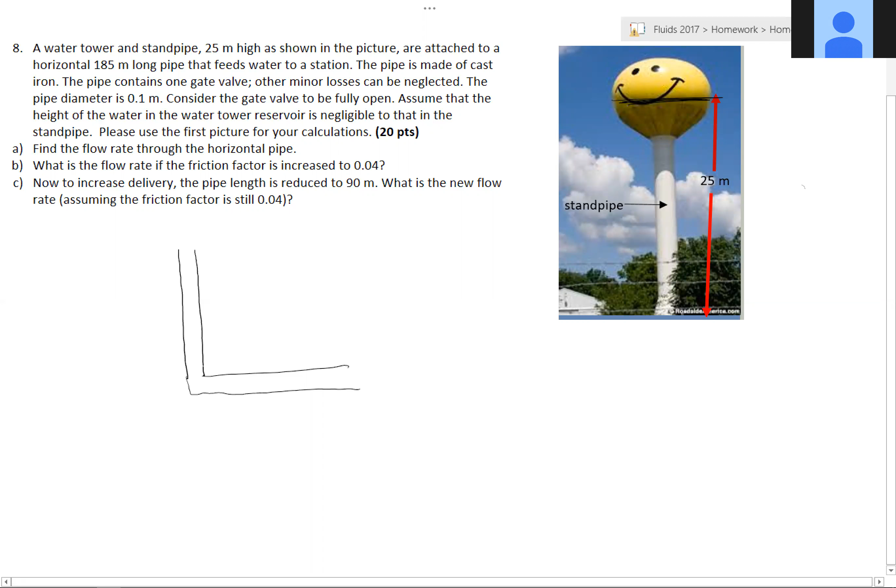So let's take a look at this. We start with the energy equation, which is in so many different forms. You kind of have to decide which is the easiest one.

So here, if we look at this, let's call this point 1, which is the top of the water tower, and let's call that point 2. Did my annotation stop? Can you not see it? Can you see it now?

We're going back to Bernoulli's about points 1 and 2. Maybe it would help if I wrote out the whole Bernoulli's equation. What can we say at 1 and 2?

P2 is atmospheric, so we know that P2 is equal to 0.

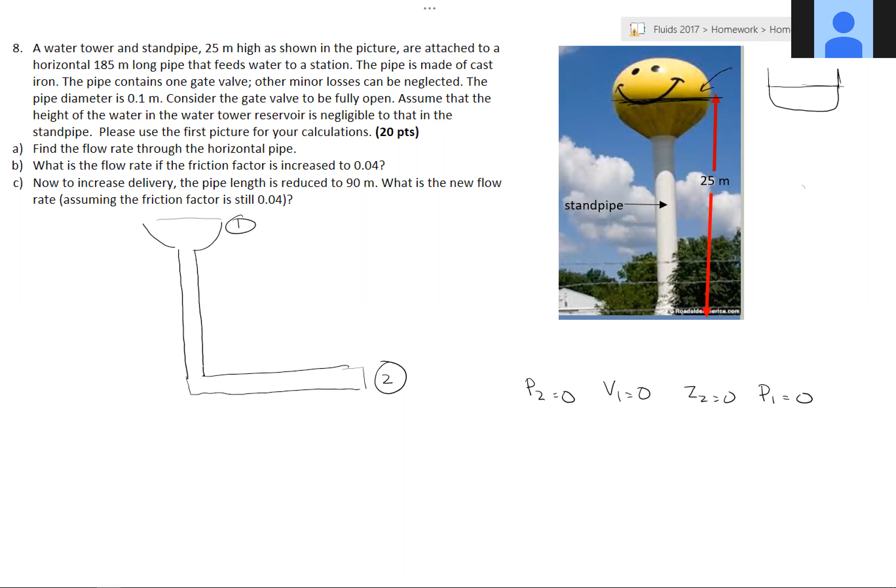Okay, all right, so we have that. And now let's go back to what our equation is. Again, I put it everywhere else but here. It's that super Bernoulli equation.

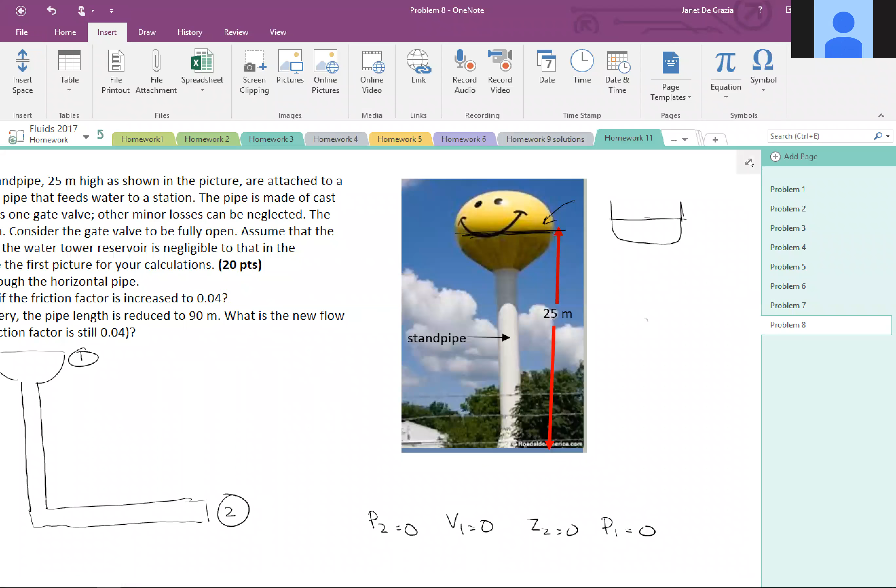So let's go back to this and figure out, first of all, we're looking for the flow rate. Second of all, basically, how do we find it? And there are different ways to do this.

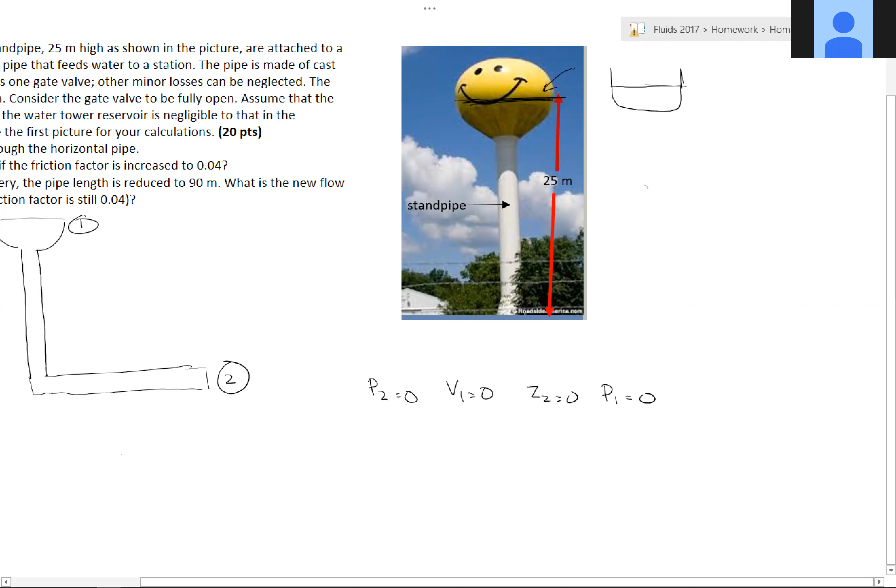So on our left-hand side is equal to our pressure. Now we can say V1 is 0, but we can't say that Z1 is 0. Actually, no, we can't, because this is point 1 up here. So what do we know about Z1?

What is that going to be equal to? Yeah, that's equal to 25 meters. So that's everything that's on the left-hand side, right? Let's look at the right-hand side. Okay, is the velocity 0 here?

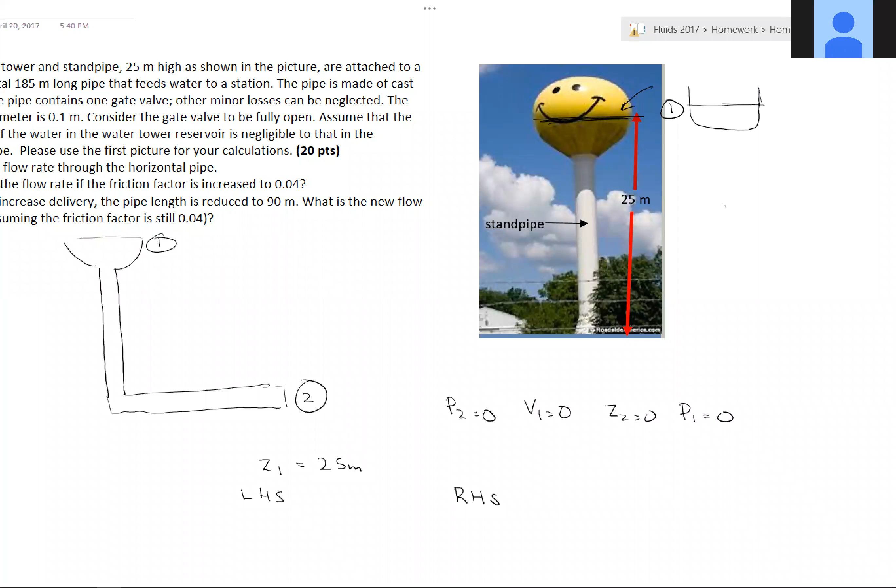No, in fact, since we are looking for the flow rate, we have a velocity term, and we can call that V2. What did we say about Z2? Yeah, that's equal to 0. So Z2 is equal to 0.

But what we have in there is head loss terms, so we have to figure out what those head loss terms are. Let me start looking for my notes here.

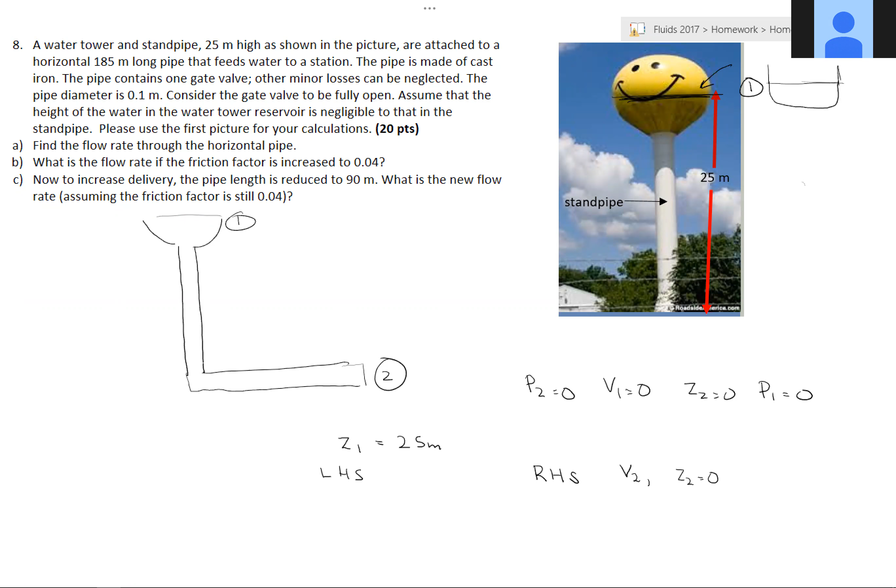We have two kinds of head loss, right? This is how they define it in the book. So we have our major head loss, which is equal to F L over D, V squared over 2.

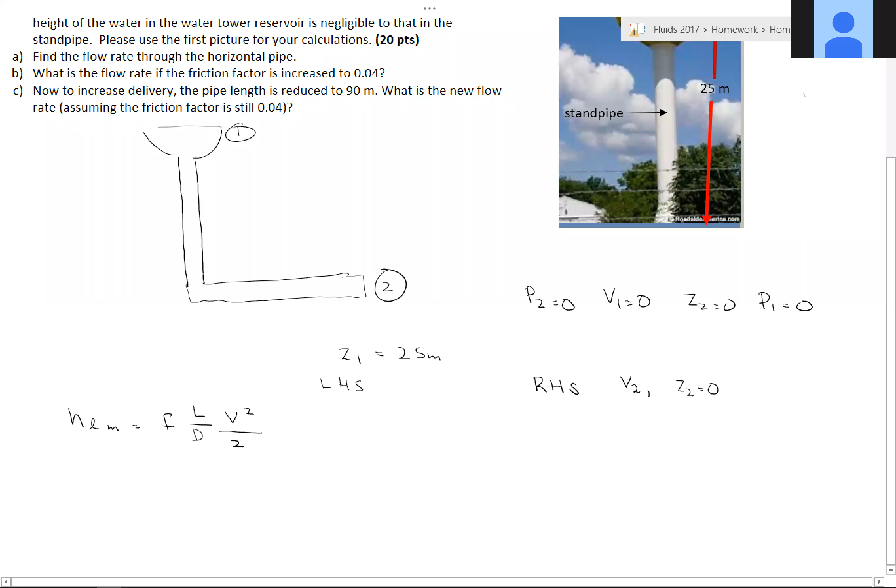And what velocity? That's actually a very good question, right? Where other minor losses can be neglected, that's a good question. That's not considered a minor head loss - actually probably should be, but right here we're just looking more at the gate valve. So here's our major head loss.

And then here's our minor head loss, which is equal to K from the gate valve times our, again, our V squared over 2. So what's the hard part about this? V squared over 2G.

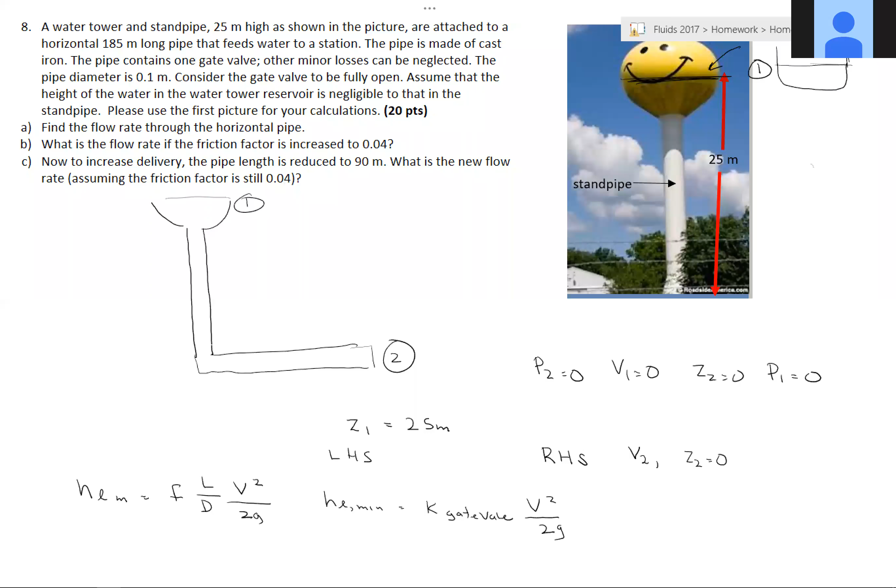Yes, so what's the difficult part with this problem? We're looking for our Q. So first of all, finding the right K is true, but all you have to do is look it up, because I think I said a fully open gate valve.

So there's a table that tells you what all the loss coefficients are, and there's one thing that says gate valves, and one of the gate valves is open versus closed. You can imagine why it would be different - there'd be different flow patterns.

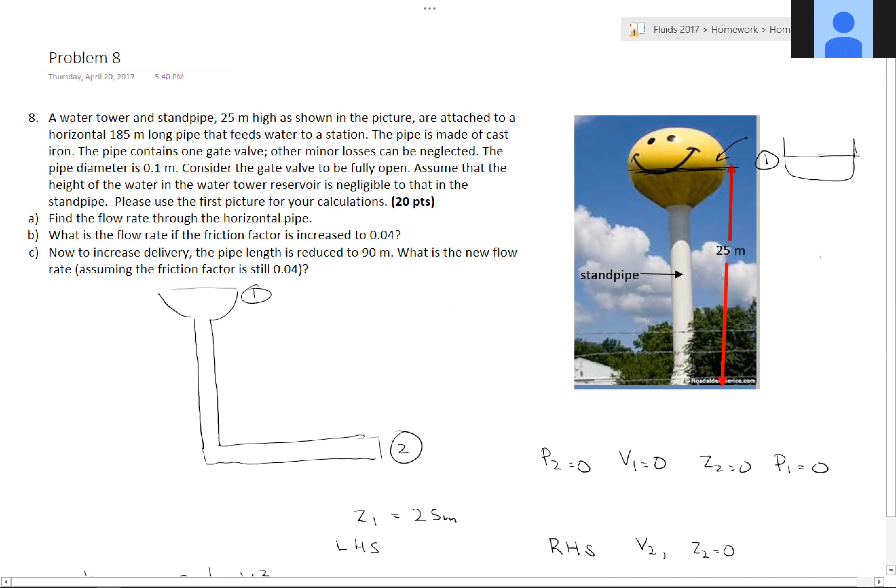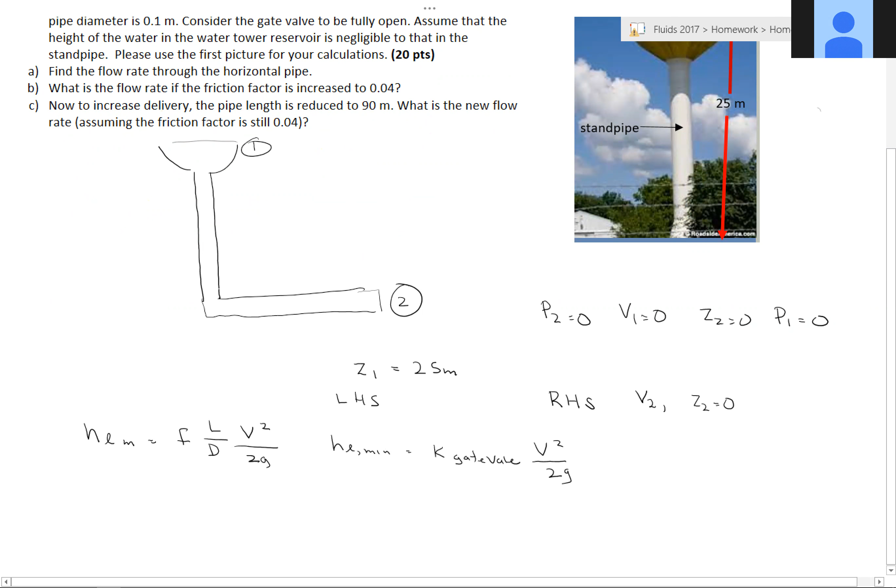So how are we going to solve this? What is it that we're looking for? Right, so we're going to have to make an assumption. And your best bet is to make an assumption that it is the worst possible scenario, which is what?

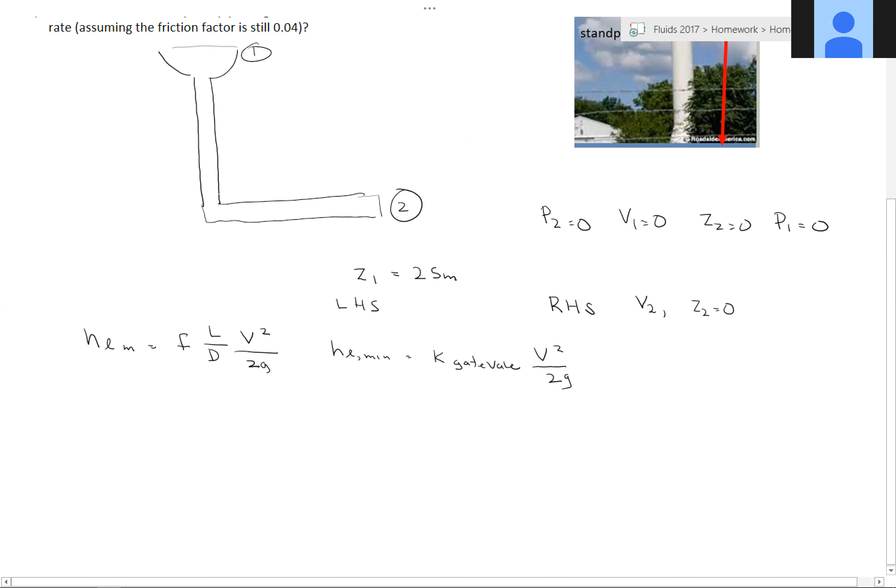Yeah, and why? It's actually beyond that. Why would you think it is turbulent? What about this problem here? Why do you think that velocity?

Yeah, it's that 25, right? Nothing's ever easy - it is that 25 meters. So when you have that much of a height, you can pretty much guess that it is going to be turbulent. Okay, so we're looking for our Q.

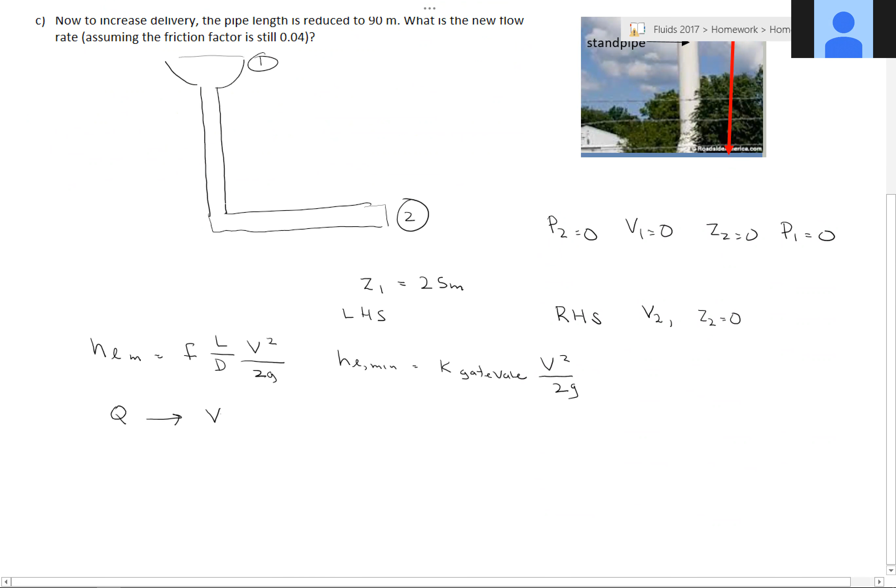And in order to get our Q, we need our velocity. So we don't have a velocity. We're going to have to use our super Bernoulli's equation, which is basically that P1 minus P2 equals, and then you have your Z's and you have your head losses.

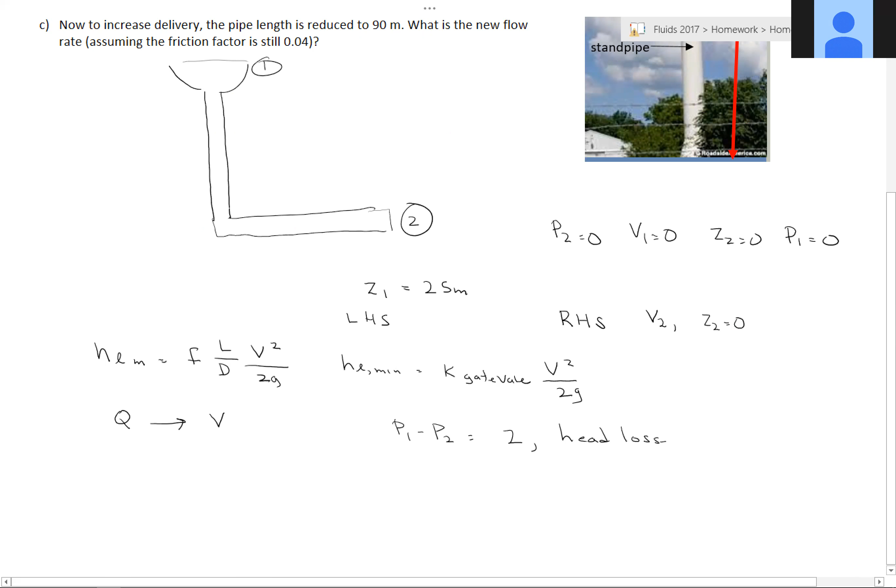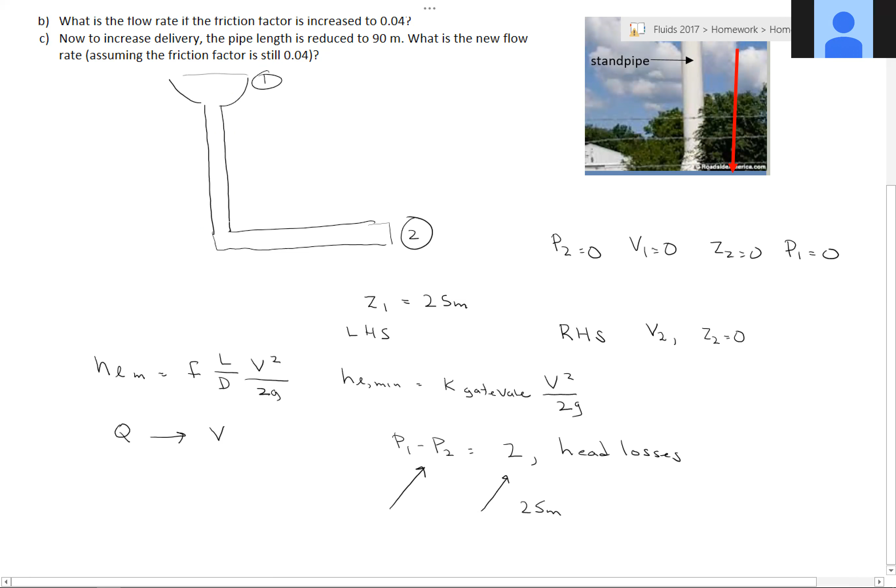So we have P1 minus P2, which is what? 0. Exactly. We have our Z1 minus Z2, which is what? 25 meters. The problem is when we look at these different head losses, we need a velocity, and we have a friction factor. And that friction factor is a function of both the Reynolds number and our epsilon over D.

So can we find our epsilon? Yep, I told you it was cast iron. What's the problem, though, with the Reynolds number? Yeah, we need the velocity.

So the way we're going to have to do this, and you're going to do this for every single one of your problems, is - and I'm going to try something, and if it doesn't work, don't worry, I will come back.

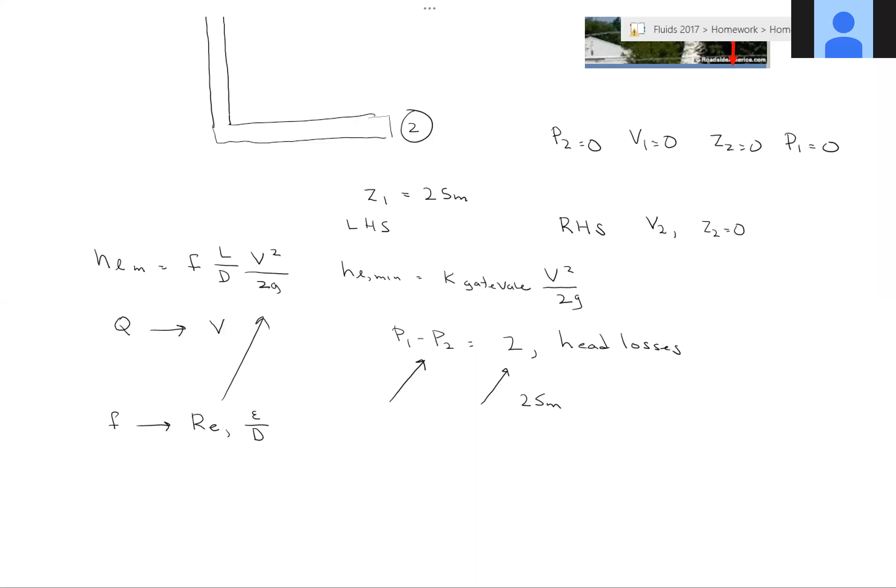That's not what I was looking for.

Are we going to use Excel? There are actually only two problems where we need to use Excel. If you go back to the book, it says if you're looking for a delta P or an L, you can solve directly. If you're looking for a velocity, a Q, or a diameter, you have to solve iteratively. So anytime you ask for the diameter, there are two problems: one with the diameter and one with the Q, meaning you have to do an iteration.

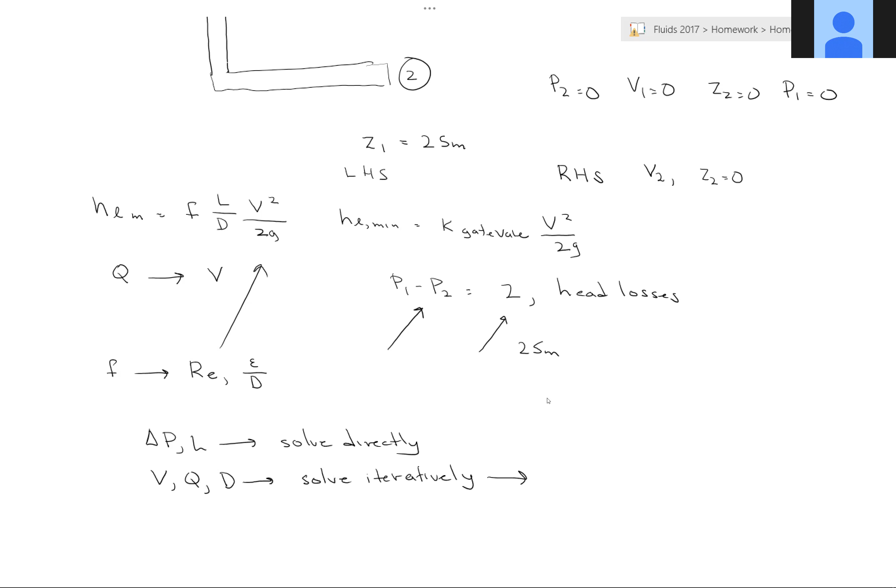So hold on, we're going back to this. If you look at the very top one here, I'm moving this. That H is the height that we have. What I did was set it up as an equation with V squared so we could solve for this velocity.

So here we wrote out our simplified Bernoulli's equation. Then I rewrote it so we could solve for the velocity. And then we need to use that velocity in the Reynolds number, and we need to use that Reynolds number in the friction factor.

So what we end up doing is, as I said, we guess a velocity, put it in the Reynolds number, put it in for the friction factor, and then set everything equal to 0 in the solver. So why is P1 equal to 0?

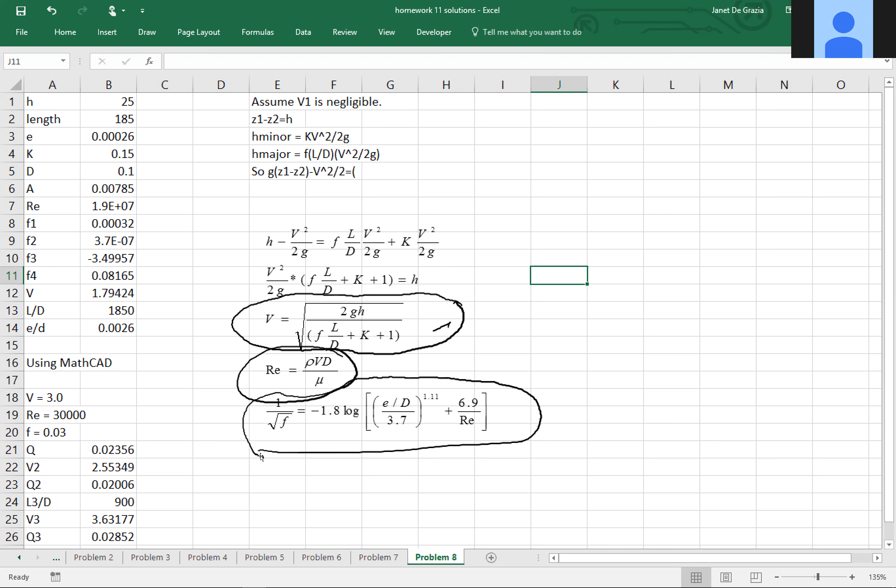Basically what we have here is when I did the water tower, I was trying to be cute, but really the way the water is, it's like this with atmospheric pressure. Does that make sense? Okay.

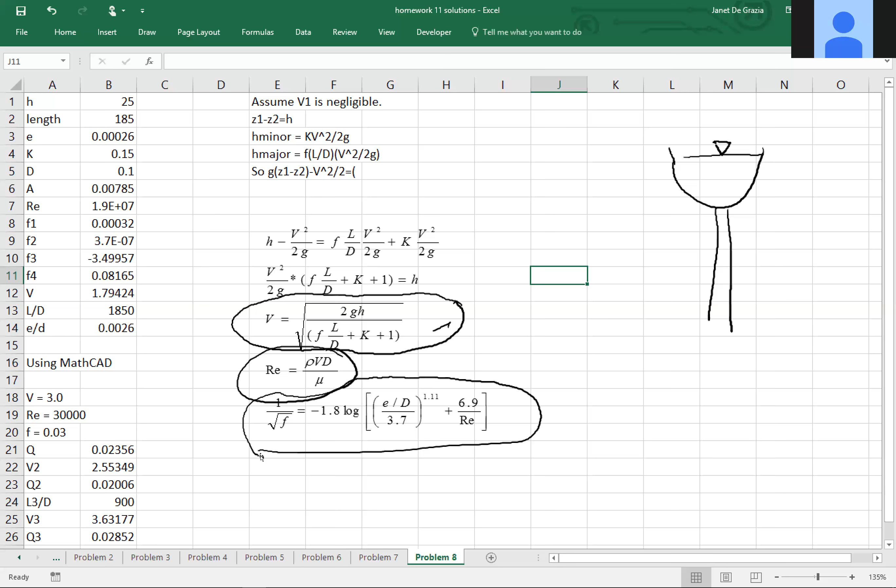One of the things I'd like to do is go through one of these problems. We may switch around with problems because I want you to see how you use the solver. I guess this is a good one to look at, problem 5. This is what I'm going to show you: setting what equal to 0. Is everybody on problem 5 and my Excel sheet?

Okay, so in problem 5, and again, I hate to keep moving around, but this is the one I was going to start with, so that I could show you how to use the solver. Let me go back to problem 5. Hold on, you're going to lose me for a second, but I will be back.

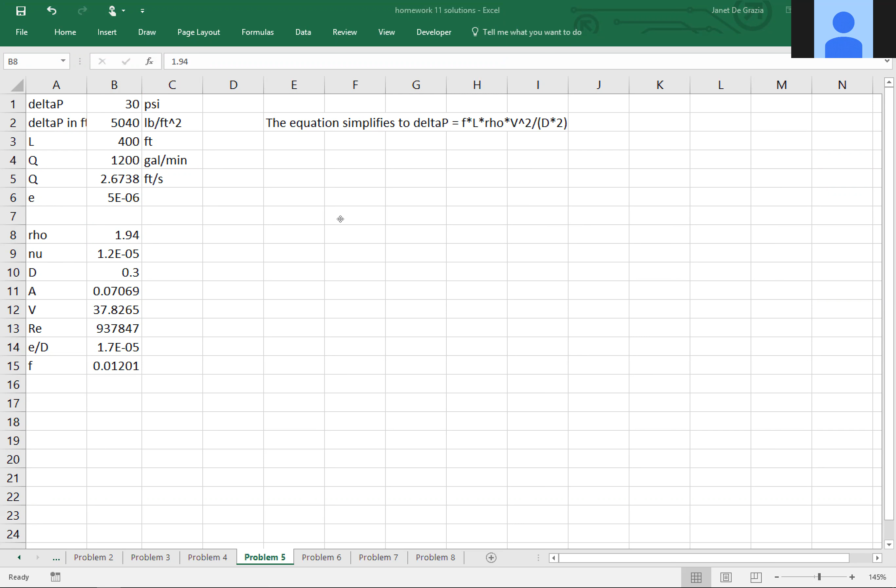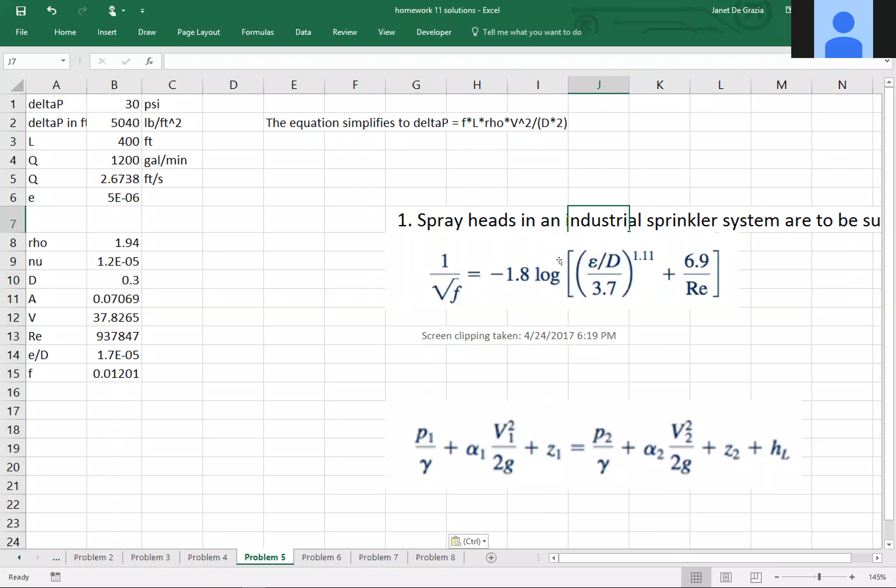Okay, so this is the one with the spray heads and everything like that. Basically what happens is we have this that simplifies to this delta P, which is F times L. Let me write that out: delta P is going to be equal to F times L times rho times V squared divided by 2D.

So what I did for problem 5, the first thing is you want to work in feet because everything is in feet. So here was our delta P, and then I changed it into pounds per feet squared rather than inch squared. Here was our length, and then I changed our Q to feet per second. Stop me if it's not making sense—I hate to keep going back and forth, but this is really the one I think will help you. Then I looked up the epsilon.

If you take a look at the problem statement, it says drawn aluminum tubing. So you go look up in your table what that epsilon is. That's good enough—drawn tubing is the same as drawn aluminum tubing. So the table 8.1, is that the one that has all the epsilons in it?

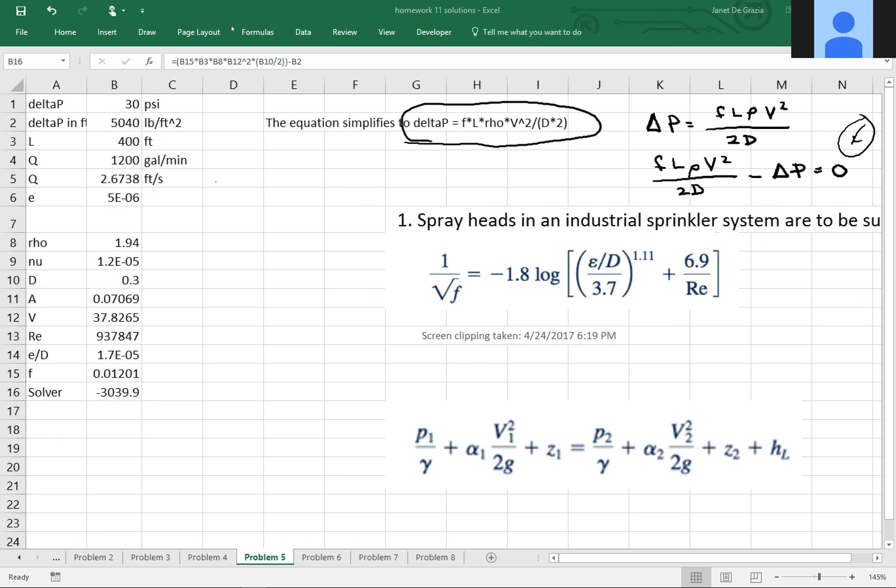Now, what this is, what we're trying to do is we're trying to use solver to find our diameter. And what we've done is we've guessed the diameter, we've put that into every single one of our equations, and now what we're going to do, when we do solver, we're going to say that we want this objective to be equal to 0 by changing, if you notice, changing the diameter.

Is that the same? Yes, that's exactly the same. So you can write it any way you want, okay? And so now we just click solve.

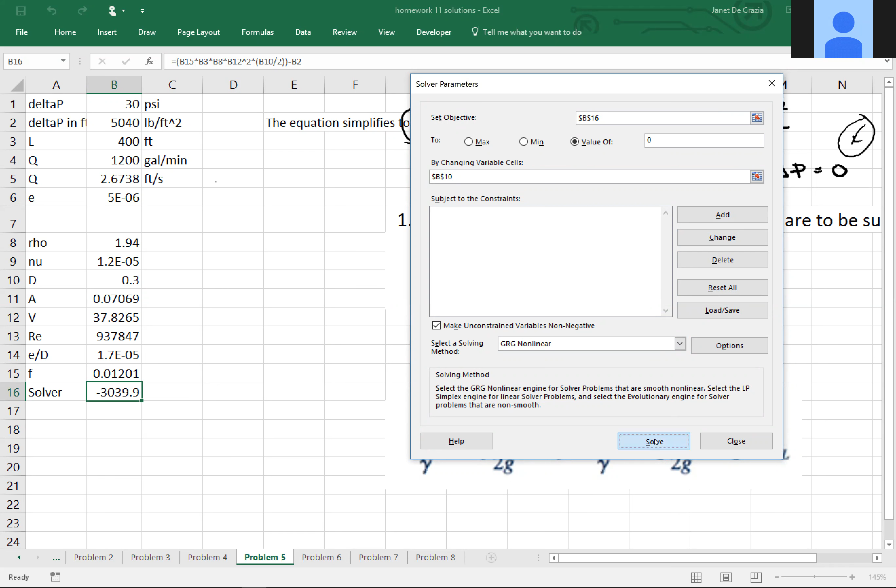And what it says is they found a solution, not a great solution, such that the diameter is equal to 0.218. And the reason that's not right is I have a couple of things entered wrong. But note, when we did that, the area changed. Yes, the solver equation is entered correctly. What isn't entered correctly is the epsilon. The velocity, the Reynolds number, everything changed

based on that. So what is nu? That is the kinematic viscosity. So that's anytime you have an iteration, that's what you're going to have to do. You're going to have to find something like this, rewrite it in terms of something equaling 0.

And if you notice here, first we had the friction, which is a function of the diameter, and we had the Reynolds number, which is a function of the diameter, and we have the friction factor that's a function of the Reynolds, etc. So we have to put them all in there.

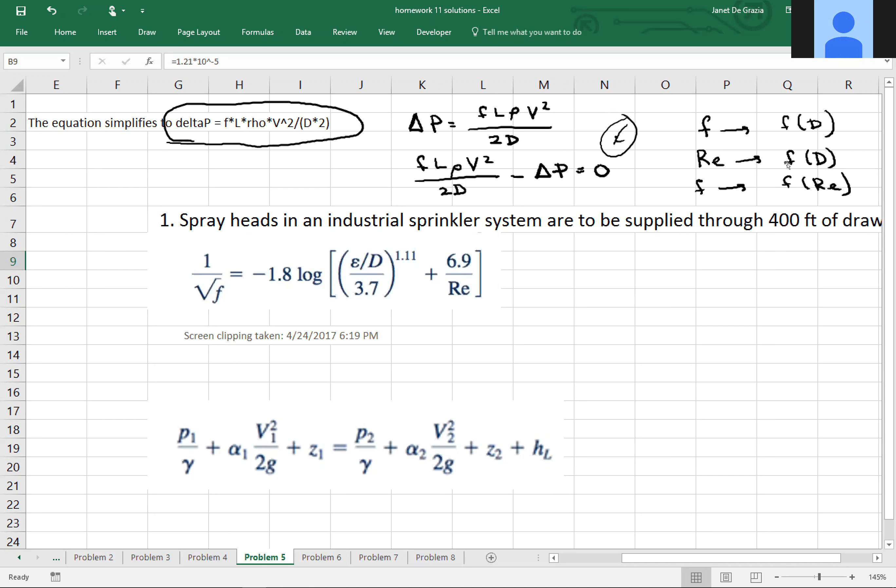Do we get rid of the velocity? No, we use them. Oh, you mean in terms of the actual equation? Yes. And now let's go back to that problem and actually the rest of the problems.

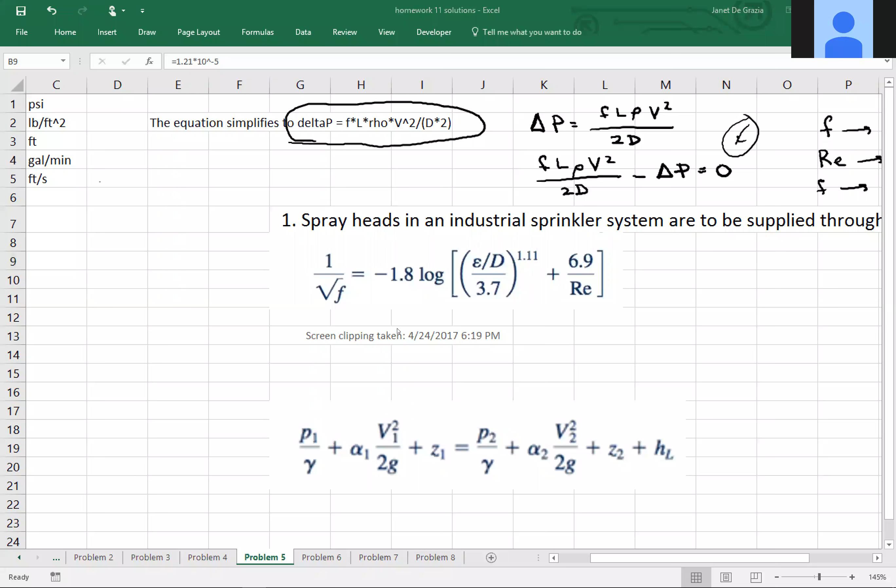So if you take a look here, what we did was we got rid of all the velocity components and the height components, because we were able to do that since minor losses and elevation changes meant they're at the same height. So for this one, V1 was equal to V2.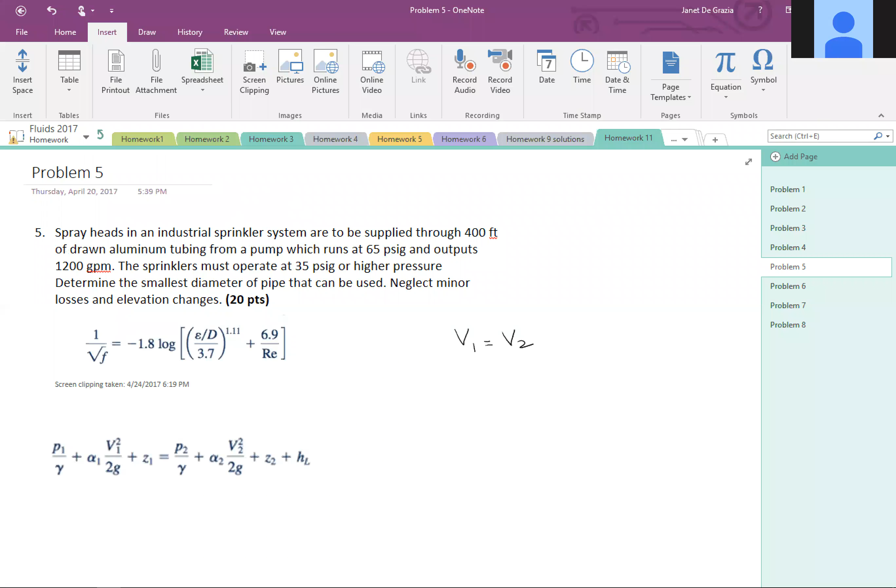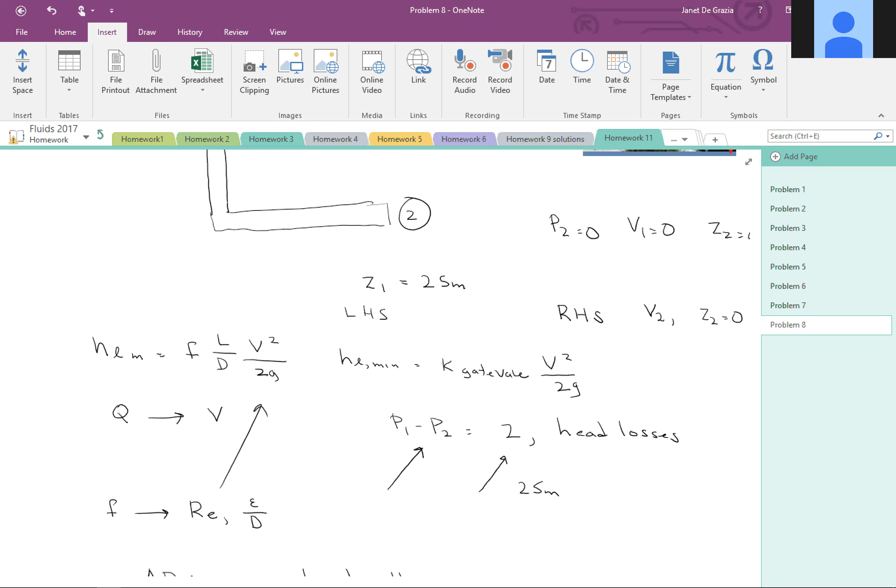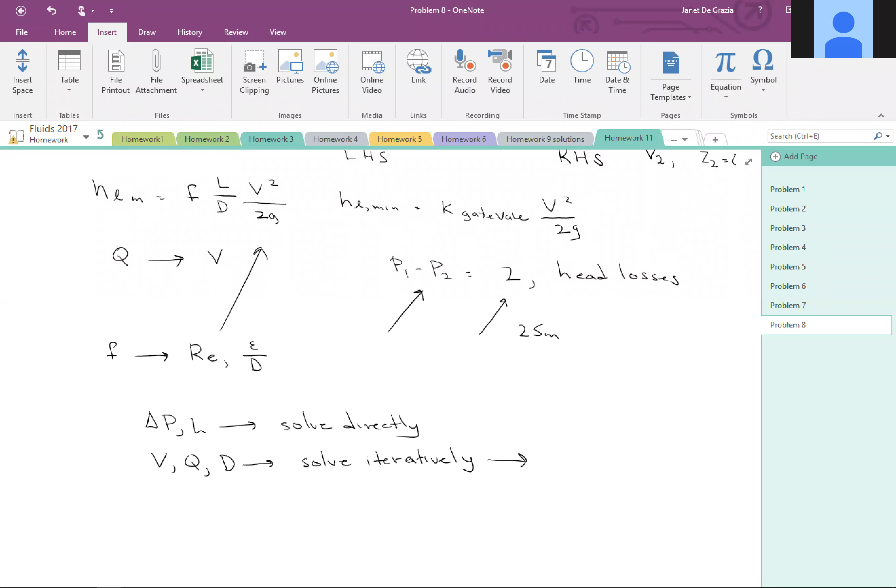What I want to do, and then I'll come back to that problem, is go back to problem 8. We're going to have to do the same thing with the velocity - we're going to have to iterate. We'll put the actual equation, simplified, guess a velocity, take that guessed velocity and put it in the Reynolds number, and then use the solver. That's only for the case when you have a velocity, a Q, or a diameter. Actually the one I showed you, number 5, with the diameter, is harder because the diameter is more of the problem. But what you're really looking at here are these two equations.

These are the ones you're going to use. For this, what we want to do when we put it in Excel is solve for the friction factor, which we can do directly. How do we solve for that friction factor using that right-hand side of the equation? We take this, minus 1.8 log of blah blah blah blah, and raise it to the minus 2. And one of the things I was saying earlier - why assume turbulent? Always assume turbulent.

Anytime you have something like an industrial system, a water pipe, spray heads, etc., assume turbulent. Now when you calculate it - let's say you calculated your velocity or whatever - then you go back and look at your Reynolds number. And if your Reynolds number is laminar, then you can go back and use 64 over the Reynolds number. But it's almost always going to be turbulent.

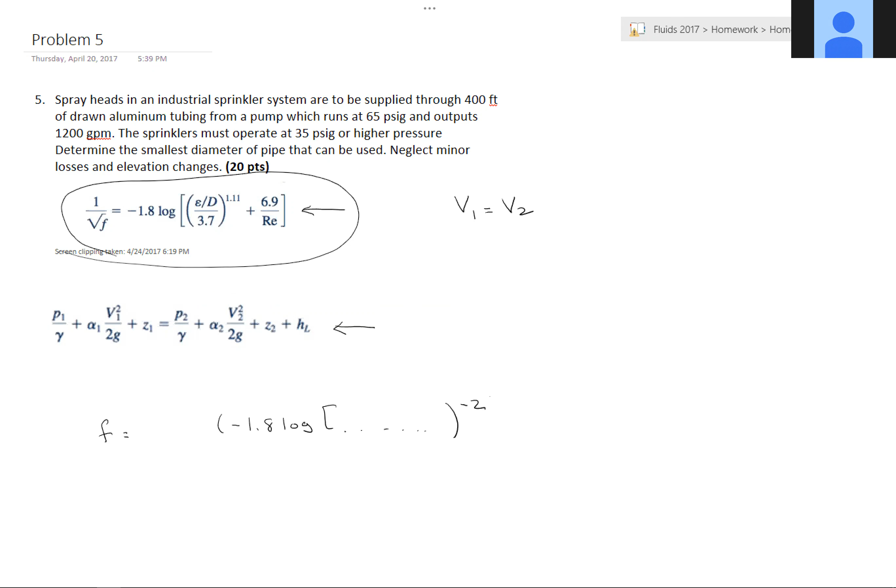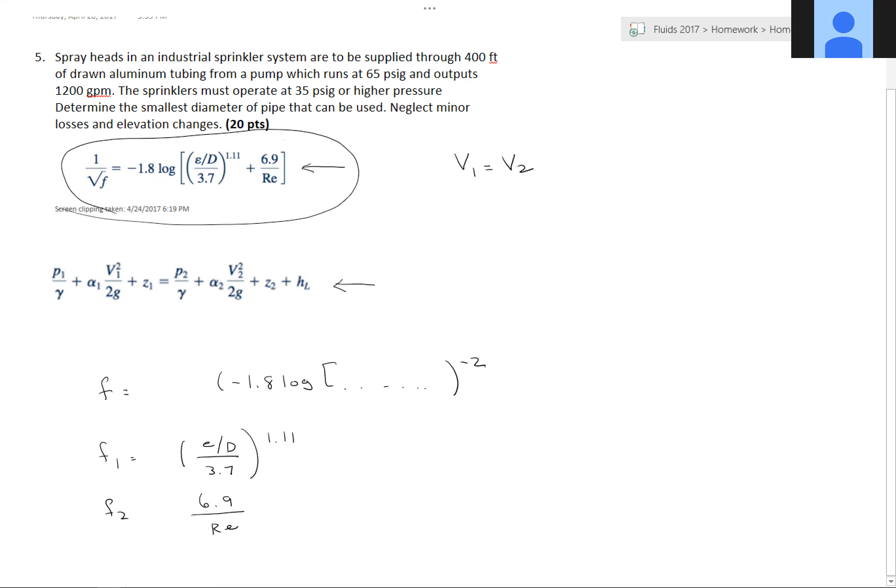One of the things I was telling people before - when I did some of these problems to find that friction factor, the first thing I did in Excel, I called it F1, and I calculated this divided by 3.7 to the 1.11. Then my F2 was 6.9 divided by the Reynolds number, and then my F3, etc. I did it step by step because you really have to be careful with the parentheses in Excel. So the bottom line is that both 5 and 8 require iteration, so they're going to require you to use the solver.

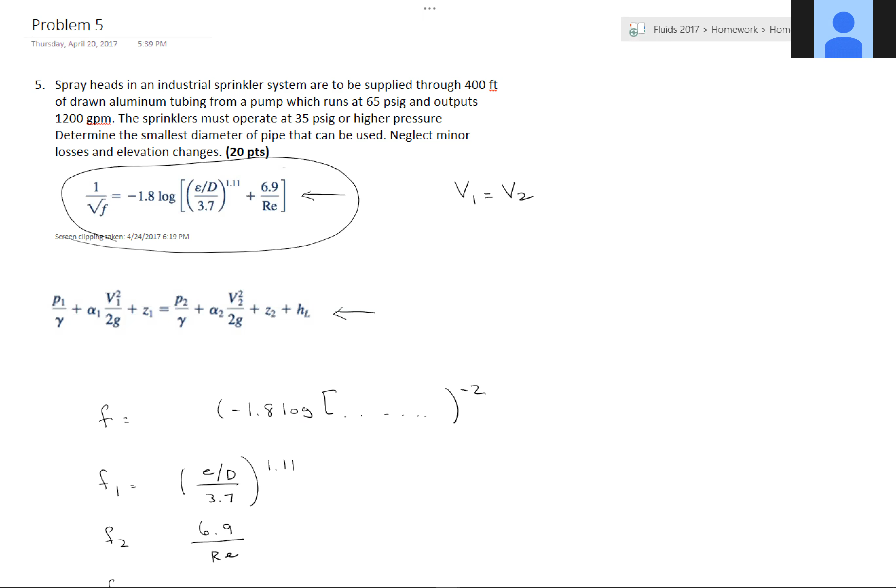So I promised that the next one we would do is number 6. Let's take a look at it. We have a corroded galvanized iron pipe. We have an inside diameter, and we have a delta Z. The important thing here is how do we draw that? So we have P1, let's say here, which is 700 kilopascals, and then 6 meters lower, this is 525 kilopascals. So the way the pipe looks is this.

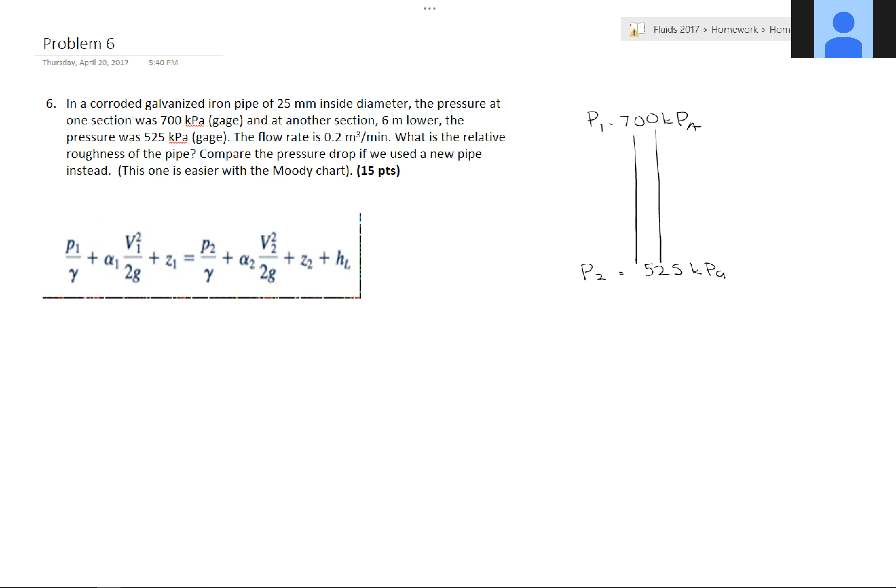So the question is, how do we know that? Part of it is because you know the difference in height has to be 6 meters lower. And if you had it at an angle, there's no way you would have the length of the pipe - or you would have the height but not the length, unless you had the flow rate. Okay, and again we go back to this equation. What we're looking for is the relative roughness of the pipe. So basically we're looking for - you could either say this, but I would take this as well. So where do we get that relative roughness?

Yes, certainly the head loss from the Moody chart, which is when we're looking for friction. So what we can do here is solve for the head loss, which means we can find our friction factor. And from the friction factor, we can find epsilon over d, and from that we can find epsilon. Or we can find our Reynolds number as well as our friction factor, and then use the Moody chart to find our epsilon. Either way, we're going to use our simplified equation.

For our super Bernoullis. And by the way, when you look at this, you have delta P. What else do you have? You have a delta Z. Exactly. What about the velocity?

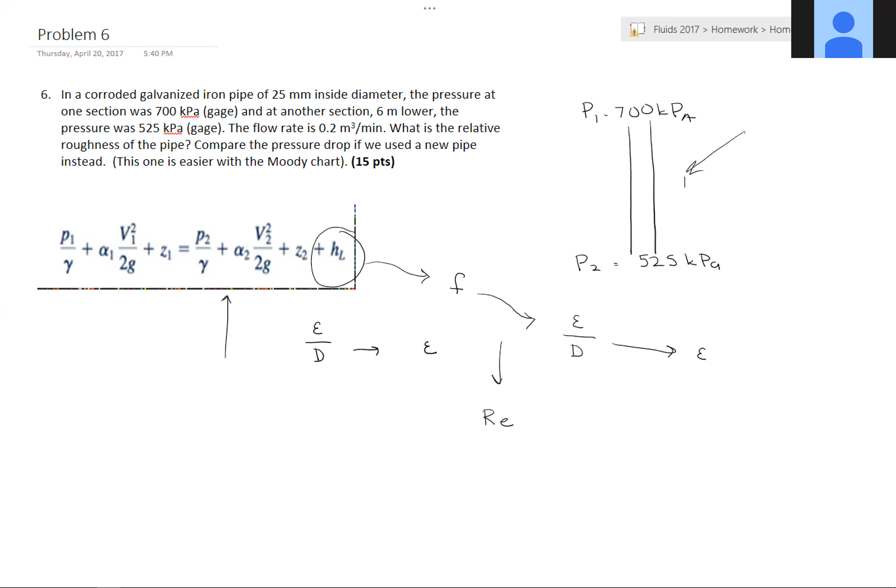Okay, all right. I promised that I would look at number 6, and then, oh, thank you. What material it is, what do you mean? So there is a range of epsilons if you use riveted steel, but if you use commercial steel, there's only one. Do you see that? All right, let's take a look here.

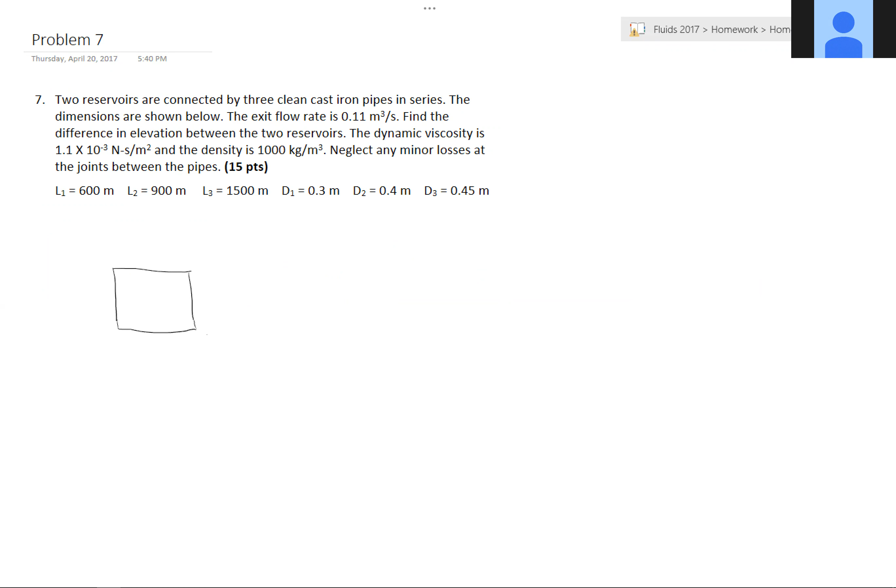Oh, let's do number 7. Anybody interested in that one? Yep, good. All right, so we have 2 reservoirs, so let's draw them. So here's one reservoir, and here's the other reservoir. And they are connected by 3 iron pipes in series.

So, let's see, sorry. All right, so first of all, if you're going to connect the pipes, where are you connecting? Where do you think the pipes are going to be in terms of the reservoir? Yeah, so not bottom to top, okay? Because remember, you have this huge reservoir, you're not going to be wanting to dump water into that reservoir. So absolutely, we're going to start from the bottom.

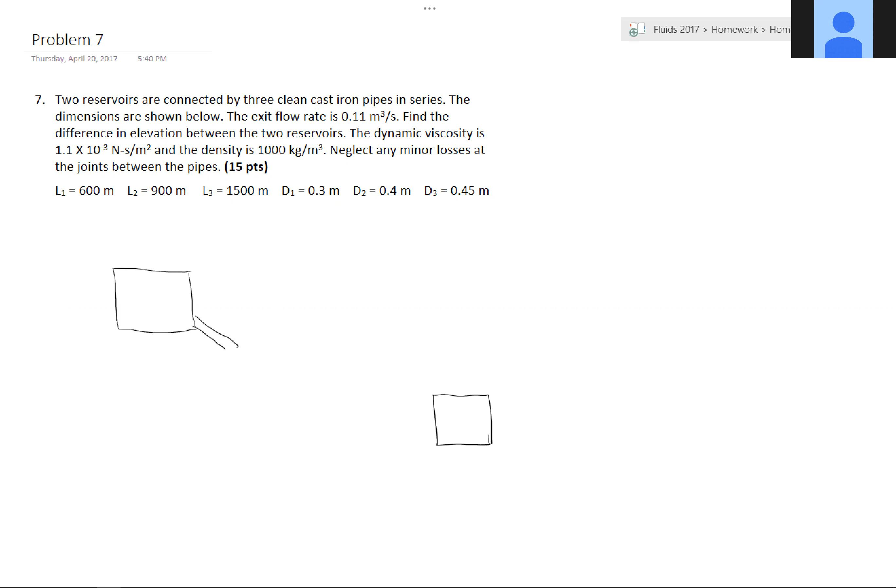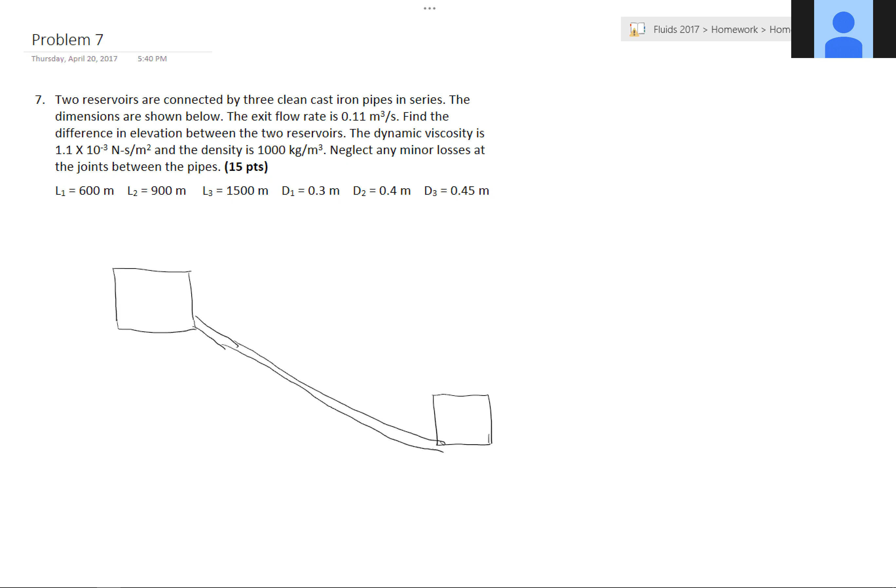But where do you think it's going to go to? Yeah, so it goes from, no, actually it goes from bottom like this. And why do you think it does? What would be the difference if it went from bottom, let's say instead we went to the top? What would be the difference? Less splashing, certainly, different pressure. No, no, no, we're getting there. Gravity's getting closer, what's the big difference?

Getting closer, that delta Z is going to change. Exactly. The biggest difference is if you go from bottom to bottom versus bottom to top, you're going to have less of a delta Z. And if you have less of a delta Z, you're going to have a lower flow rate. Okay? Does that make sense?

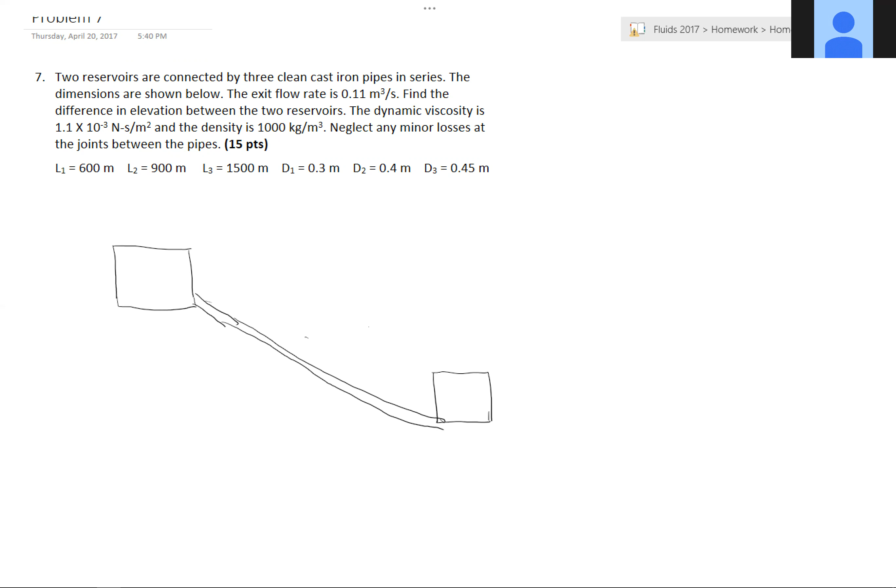Okay, so that's why in something like this, you would go from bottom to bottom. When it says we have this exit flow rate of 0.11 meters cubed, find the difference in elevation between the two reservoirs, and then I give you the dynamic viscosity and the density. Neglect any minor losses at the joints.

We're going to do our super Bernoullis, and we're going to do it from where to where and what. But remember, we're looking for that delta H.

So why would you do it from top to top? What kind of information do you have there? By the way, that would give us delta H, absolutely. So here's our delta H.

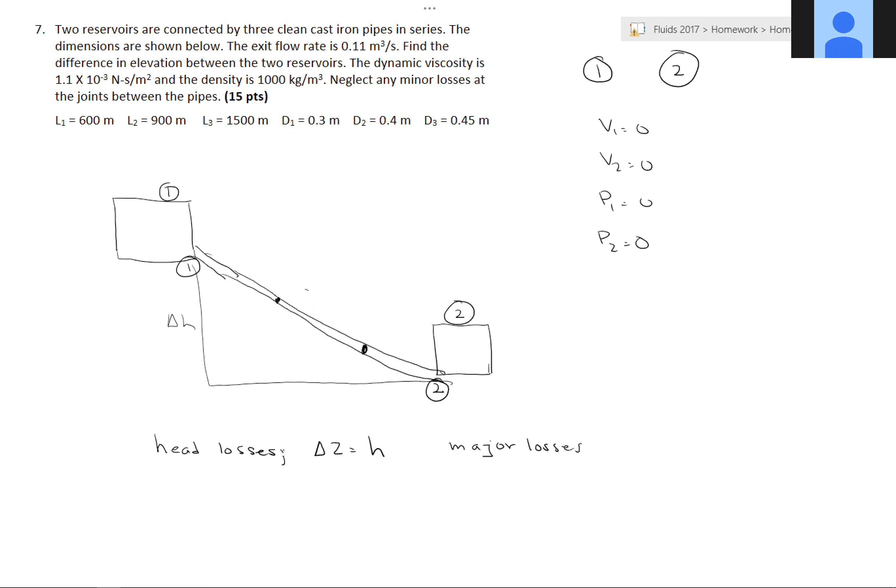So why is V2 zero? Because this is a reservoir, and anytime you have a reservoir it's much larger than the pipe. It doesn't matter if the pipe's going in or the pipe's going out. And yes, we are doing top to top right now.

It's not the exit flow. What we're saying is we're looking at this versus this. We are not looking right here. Obviously, that is not going to be zero. It's absolutely not going to be zero.

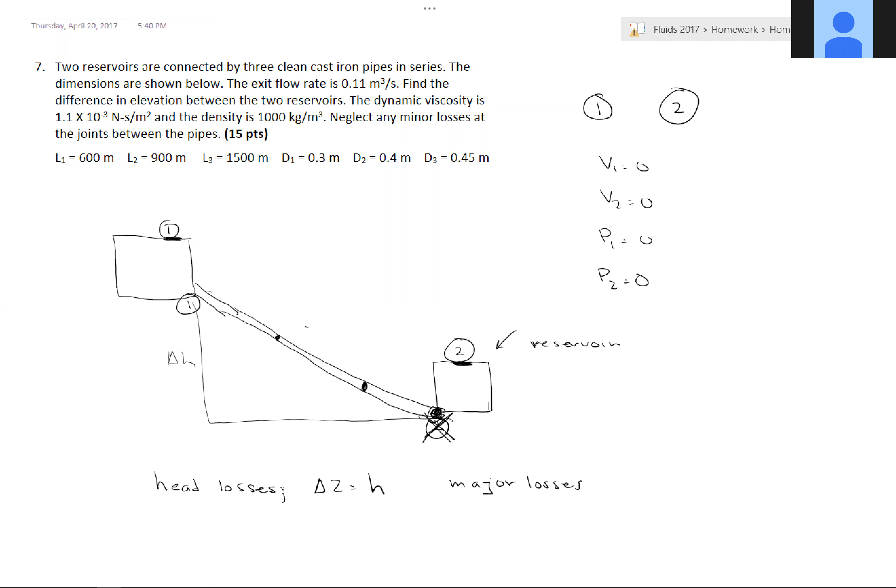How are we, by the way, going to find out velocity? Because we are going to need it. Yeah, we're going to find it from Q. So we're going to be able to find all these velocities because that Q is going to stay the same.

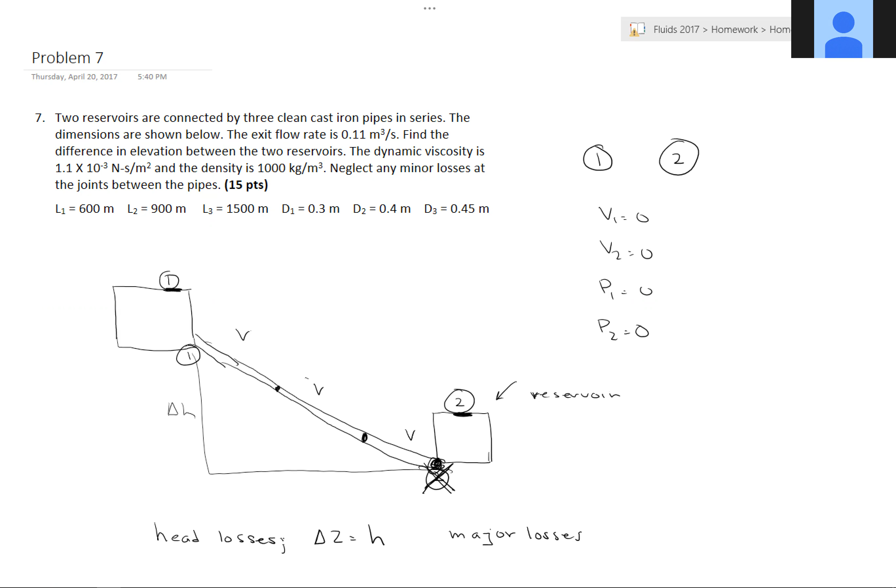No, you don't average the diameters or the length. You have to find it exactly right. We have to find the head loss for each one of the sections. So basically what we're going to have to do is find the velocity for each section. And how are we going to find that velocity for each section?

Using Q, so that's going to be Q over A. And it's going to change because the area does. And then once we find the velocity for each section, what are we going to find next?

Yeah, so then we're going to find the Reynolds number for each section. And we know what the epsilon is and what the diameter is. So then what are we going to find for each section?

That's exactly right, then we have to find the friction factor for each section. And by the way, why does that change? It's the same height, but the diameter changes, therefore the Reynolds number and the velocity are both changing.

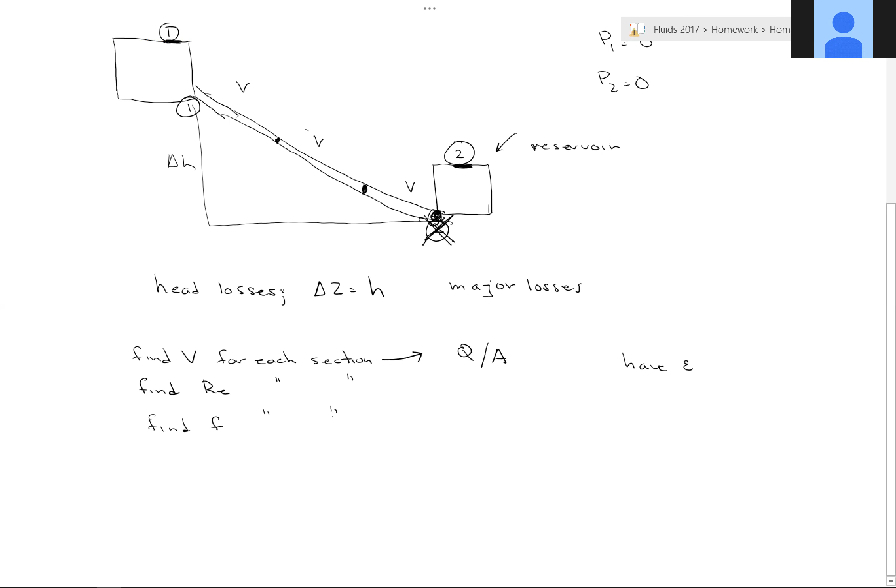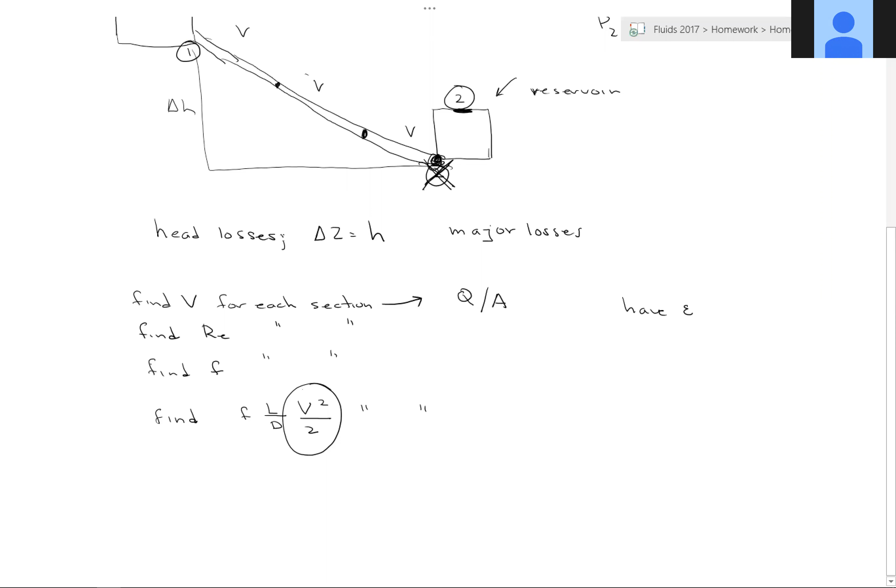Okay, and then what we're going to do is find that head loss for each section. And this velocity, remember we're talking about what we were saying before, is the velocity in each one of these pipes. Okay, now are there any, let's see, anything there?

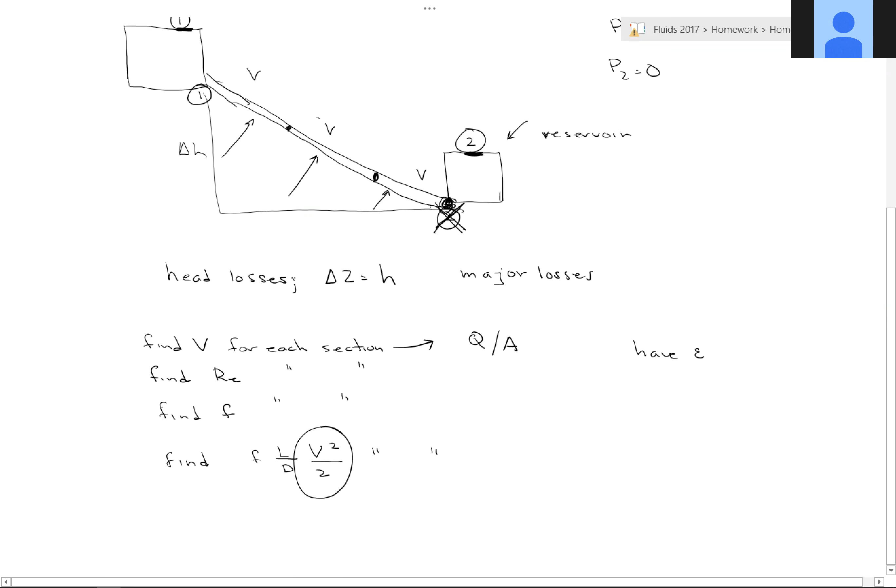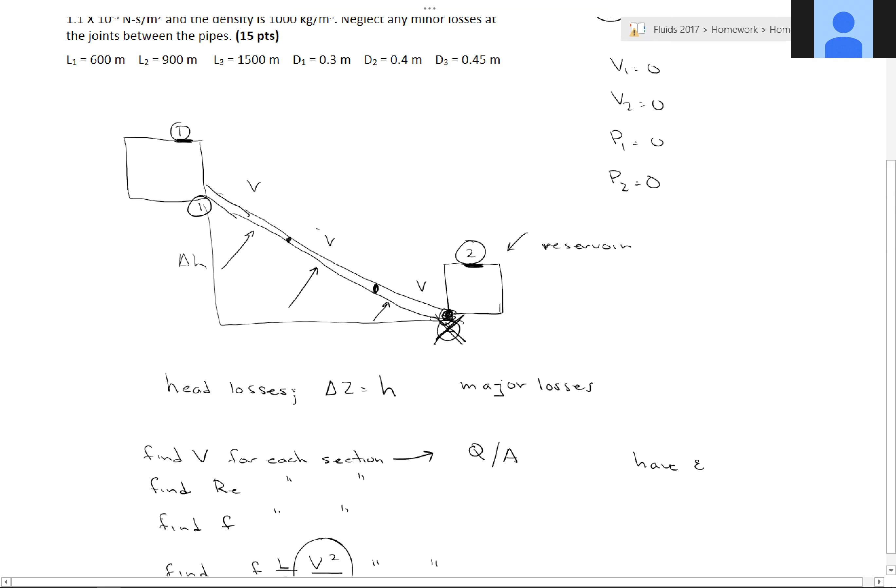Why top to top? Why does it make it easy? Let me show you what would happen if we didn't use top to top. Why top to top rather than bottom to bottom?

So if we decided instead to do 1 and 2, would V1 be 0? Would V2 be 0? Would P1 be 0? Would P2 be 0? Exactly. So it makes it a lot easier. It's still the same height. That's one of the things about these energy equations, or what I call super Bernoullis.

You can pick the place you want it to be, so what you do is pick the easiest place. That's why we went top to top, because we don't know the pressure. At least we know what the velocities are, but we don't know what the pressure is. All right, so then once we find that...

We have to do section by section because the velocity changes in each section because the diameter changes. The Q is always going to stay constant, but the velocity changes because diameter changes, so area changes. And if those change, then the Reynolds number changes, and then the friction factor changes. So that's why we, okay, cool beans is good.

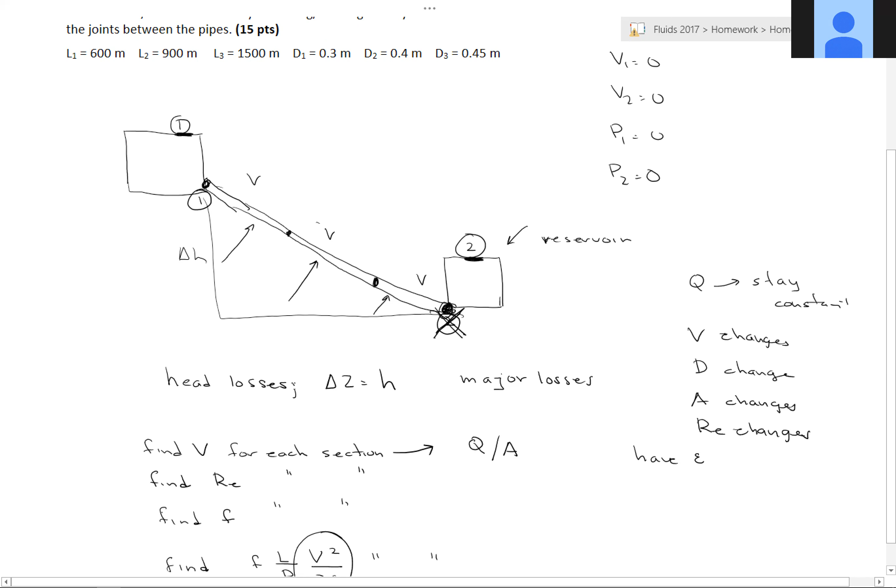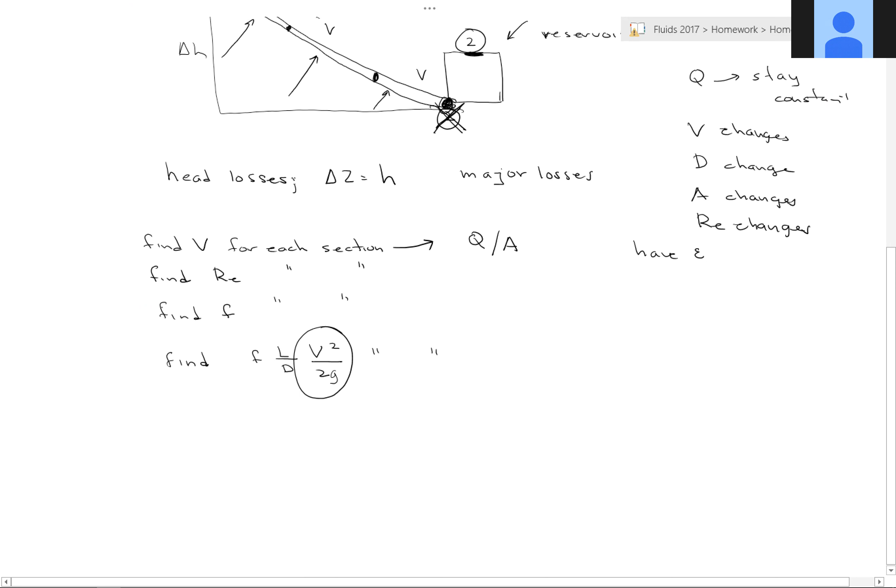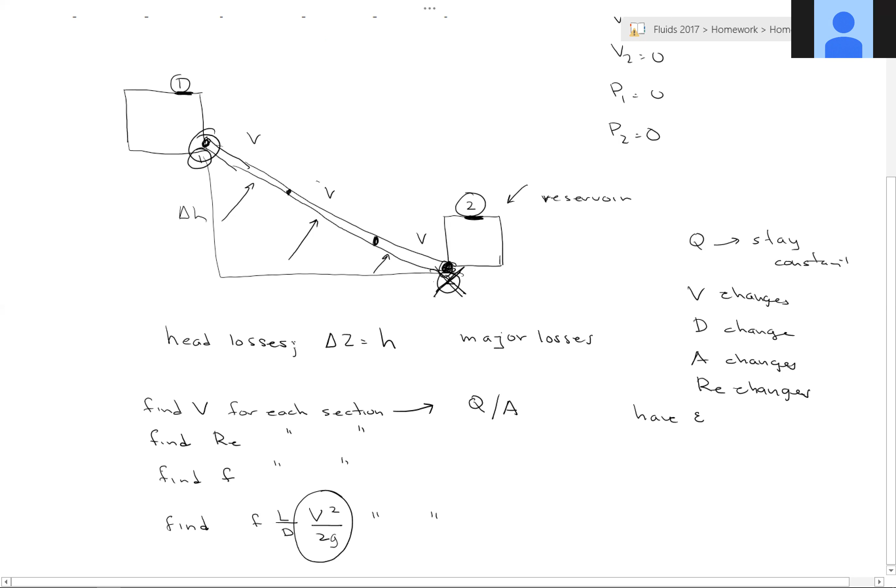Now there's one other sneaky thing in this. It says neglect between the pipes, between the reservoirs. What do we have to take into consideration that we haven't done? This and this — it's actually not called a joint, it's called entrance and exit minor losses. So what do we actually call that when it comes from something big to something small?

If it goes from something big to something small or something small to something big, what kind is that? You're right, it's a loss coefficient, and it's either, in one case, a contraction. In the other case, it's — what's the other word? Expansion, thank you. You guys spell it just as brilliant as I do.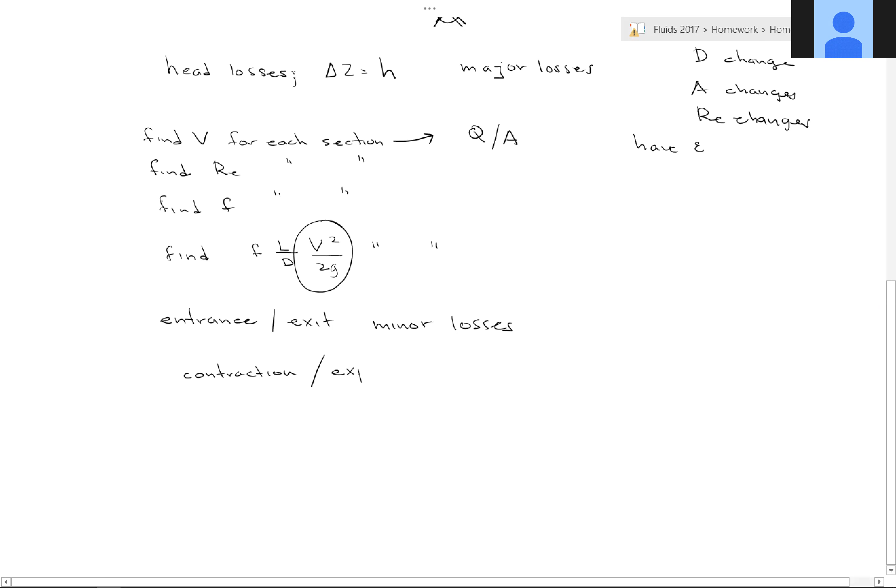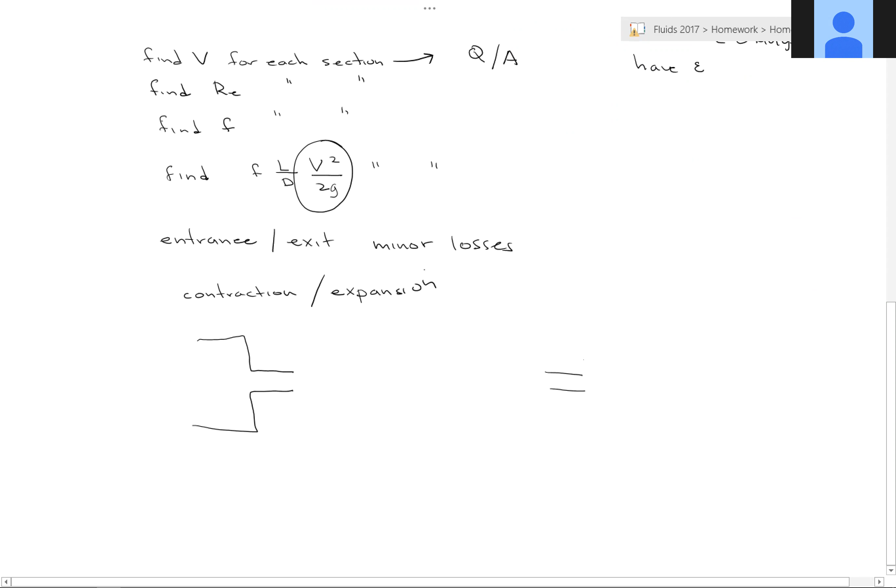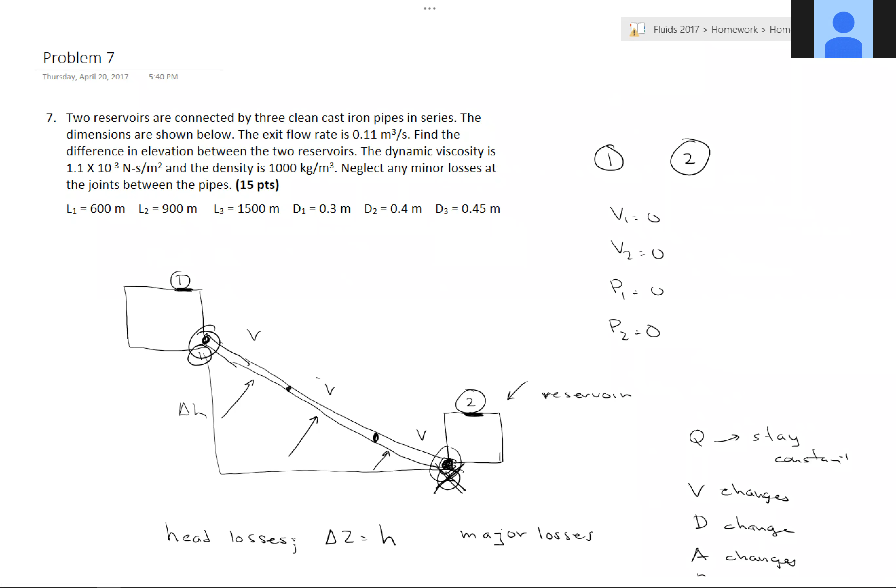0. So what does that mean the loss coefficient is going to be? Excellent — no, be careful, you're right, you're wrong. So not only are you going to have it with that, but if you take a look at, instead of the expansion, the contraction, you go that A2 is divided by A1. Now again, you're going to say that's equal to 0, and you're going to find that case on the top.

So you have to be very careful, and when we start reviewing, etc. When you see a reservoir and when you see a pipe, you have to consider an entrance or an exit loss coefficient, and you have to consider that the ratio is going to be 0, and therefore your loss coefficient in this case is 1. Does that make sense? Yes.

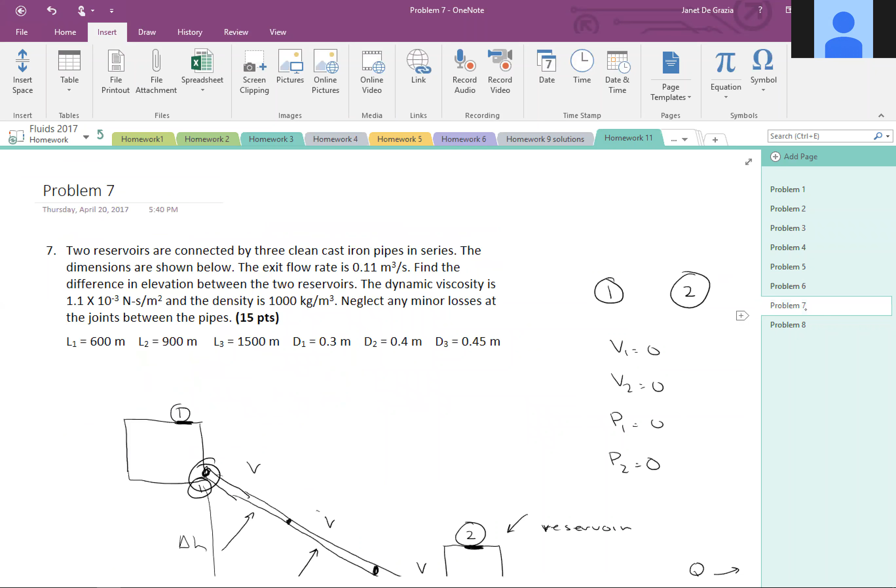I'll go back to that problem. We're going to have 2 there, because here we have this contraction, and here we have this expansion. So we have 2 minor head losses. What they did say was, don't include this and don't include this. Okay?

Not our K — I'll come back to you. Our K value isn't 0. It's our A1 over A2, which is 0. So the ratios go to 0, which means you go here, but for example, here, now your K sub L is 1. Does that make sense?

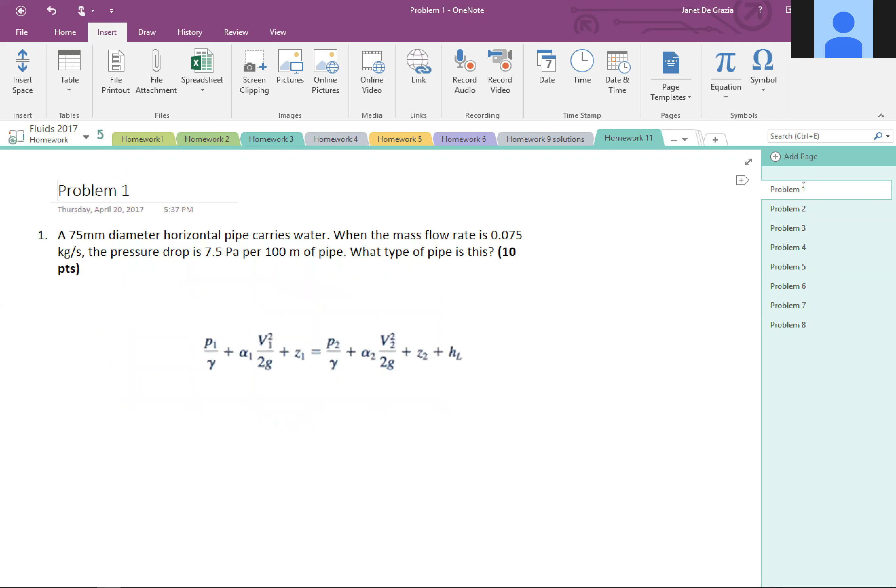Okay, so now let's go back to somebody — you're welcome — that's getting some negative number. Can you go back and ask that again? Because I don't have the full chat up. Number 1, there's a weird error. Okay. So what's the weird error? So what kind of negative number?

Sorry again, I'm trying to find — 3, 2, here's mine. All right, so when you solve for epsilon over D, how did you solve for it? You have to be careful when you say the friction equation — are you talking about the energy equation and then solving for F?

Remember, it's not laminar. In fact, the Reynolds number indicates it's not laminar. You could use the Haaland equation or whatever. There are a couple of ways that you can solve this.

The first thing you can do is use the energy equation, but remember that there's a delta P in it. One thing you could do is use this, knowing that the friction factor is in here, and solve for the friction factor.

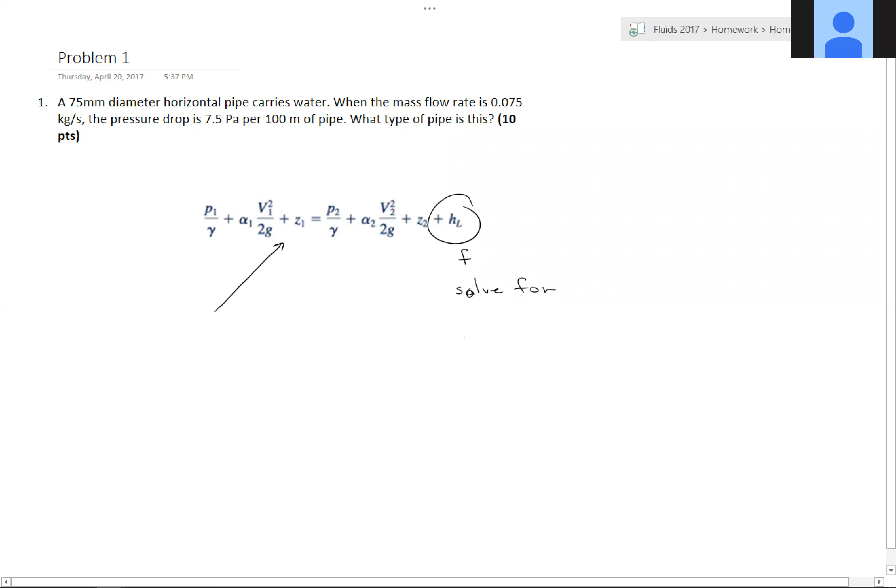So that's the first thing you could do. Once you have the friction factor, you can solve for the Reynolds number. Then once you have the Reynolds number, you can solve for E over D using whichever equation, either 8.35A or 8.35B.

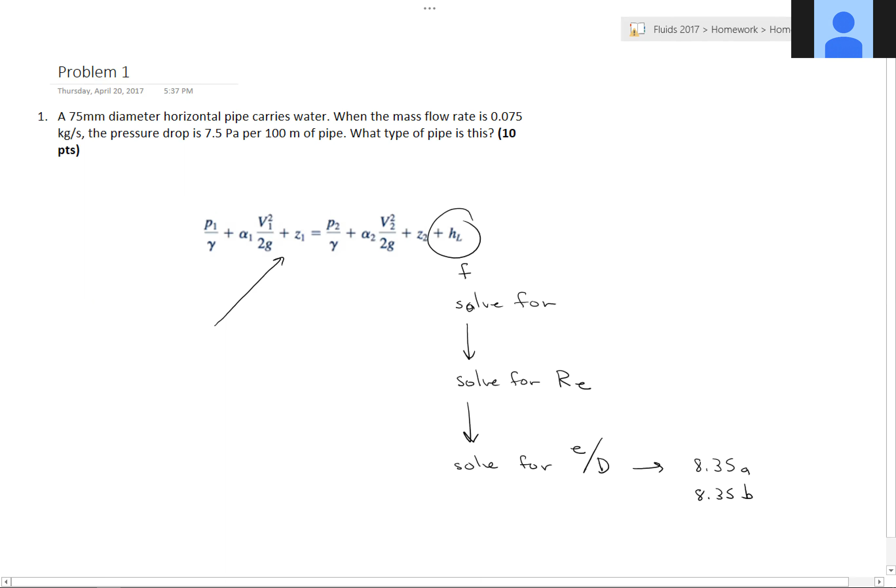You don't get the Reynolds number from the friction factor. What you do get the Reynolds number from is the mass flow rate, which you can change into velocity. You have rho, basically rho v, the diameter, and mu. From that, you can get the Reynolds number.

Yeah, I know. But the thing is, we've been doing all these really complicated problems, and now all of a sudden we're getting sort of an easier one. What do you mean, what is?

So there's a power of 1. Where'd you get the 1?

Okay, let's go back. Let me see where I put that. All right, I didn't put it there. Did I do it here? No. Did I do it here? No. I know I put it somewhere. There it is. Is this the one you're talking about?

Yep, you have to. I think I gave you this, but if not, just look it up and then use the Moody chart. Yes, I use the Moody chart. A number of people did, which it sounds like AK did, use this equation. So why do you have 1?

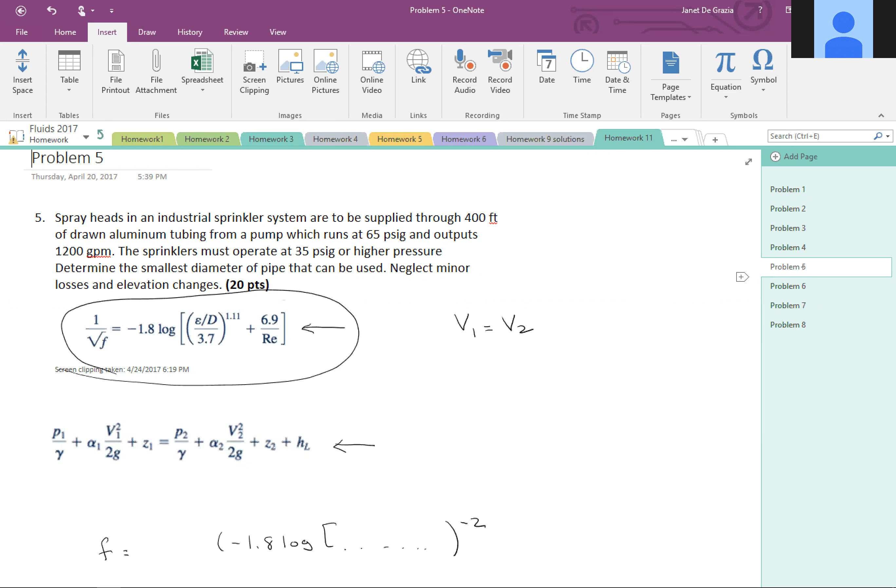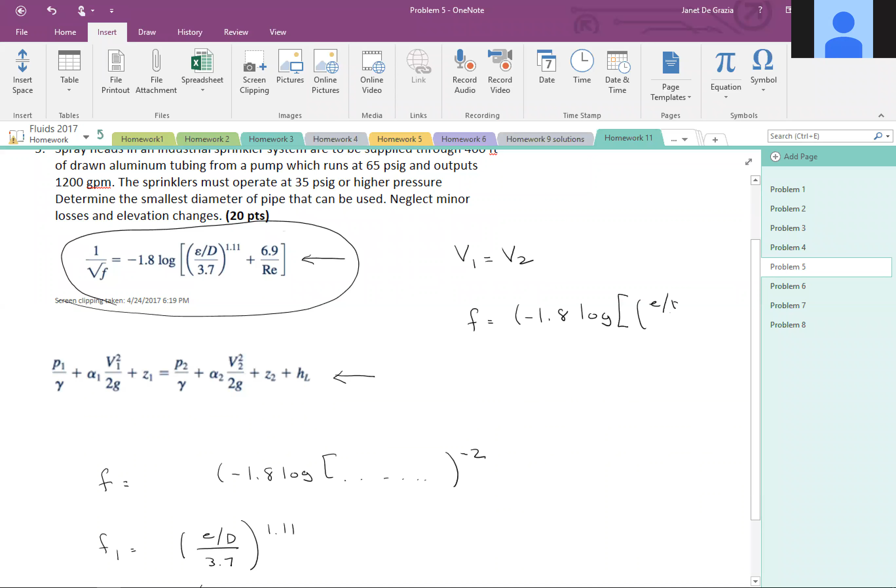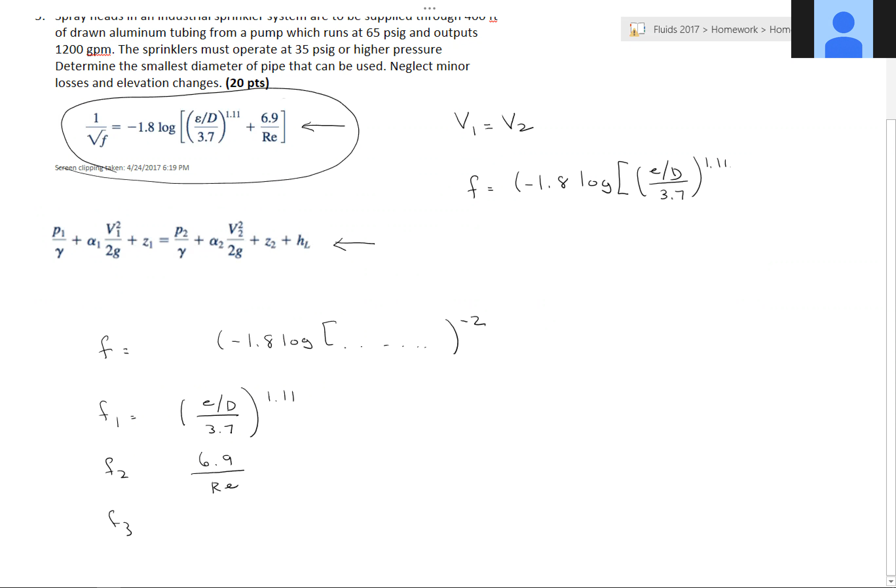Okay, so if you rewrite this nasty little thing, what you get is that the friction factor equals minus 1.8 log of, right, this, blah blah blah. And I guess what you did was rewrite it in terms of E over D. No, you don't use constant. My suggestion here is, for this first one, use the Moody chart.

Okay? Solve for the friction factor. You have the Reynolds number. Use that Moody chart. It does seem easier. And for number one, no, you're not supposed to get that.

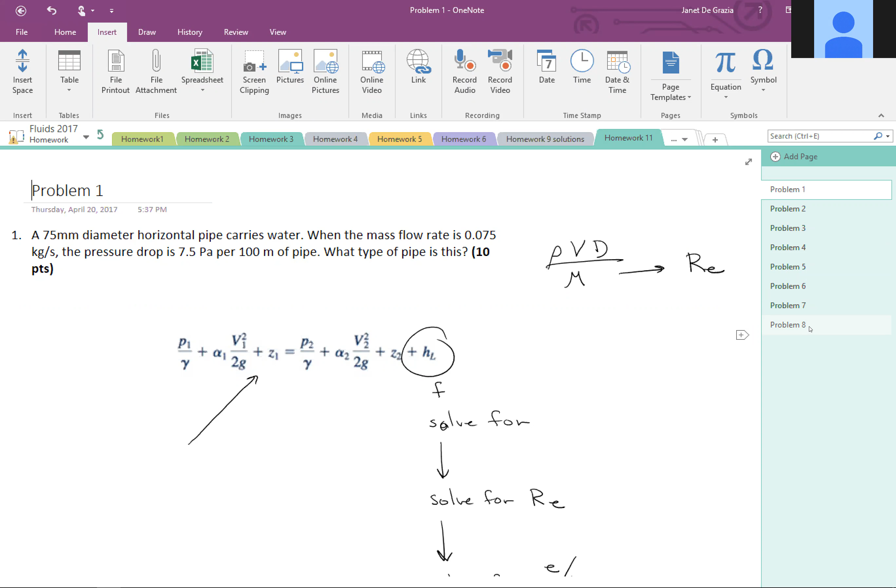Basically, what's going to happen is you're going to have this, right? It goes like this. So you have a friction factor, you have an epsilon over D, and you have a Reynolds number, and you have all these things. And what you're going to end up doing is find your Reynolds number, find your friction factor, and find where the two of them meet.

And from that, you're going to have to follow that line. It doesn't go straight across. It follows whatever this line is to the E over D. Is that what you were doing? Or did you go straight across?

What did you get for your epsilon?

Way, way, way up. I mean, like, way, way, way up. Orders of magnitude. So I would go back and check that. But it sounds like you're doing it the right way.

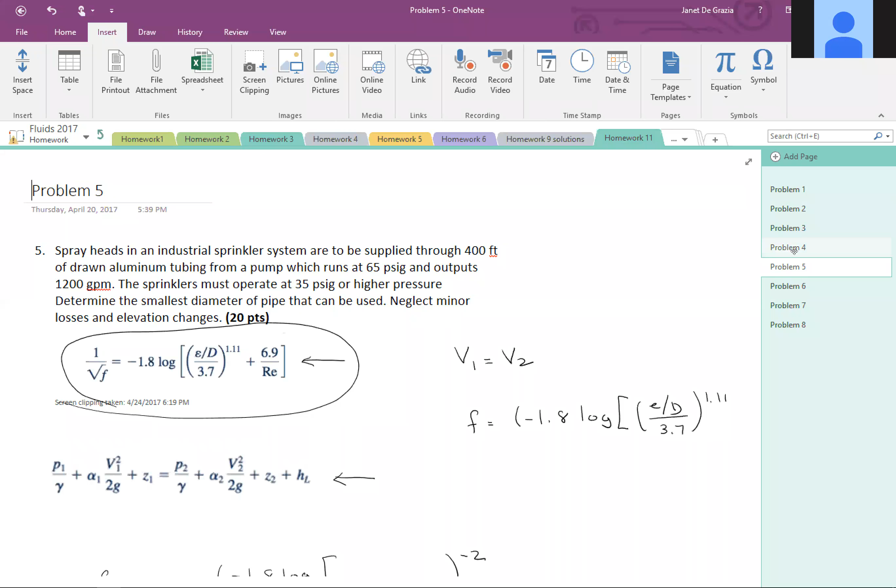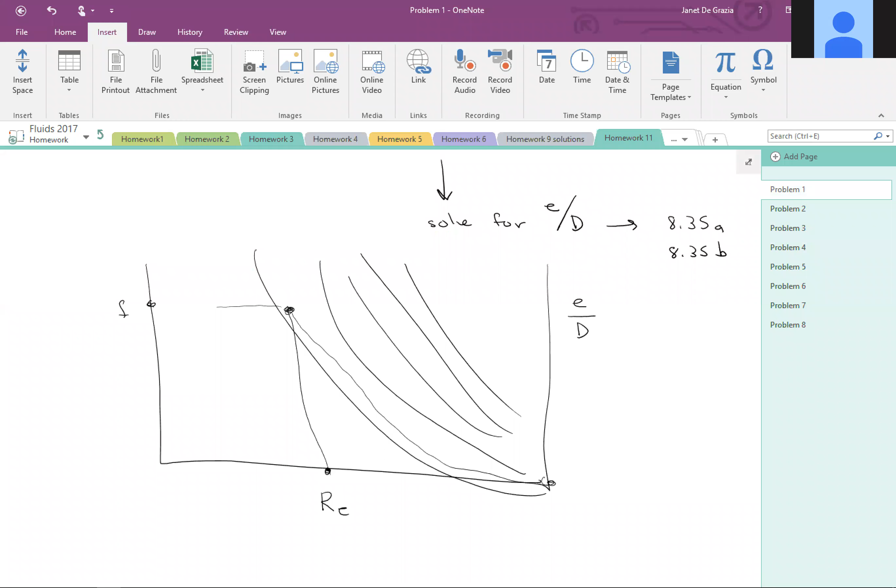If you don't have a viscosity and I don't give it to you, assume it's 25 degrees and look it up there. Obviously, in any exam problem, I will absolutely give it to you.